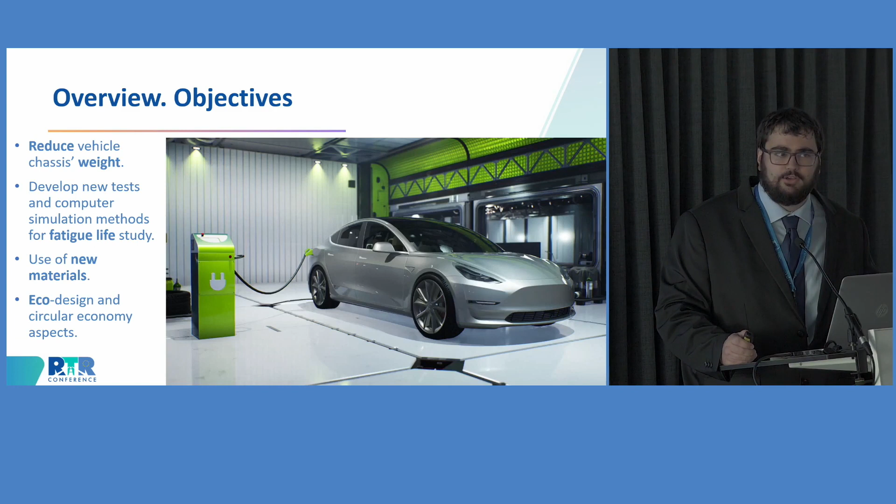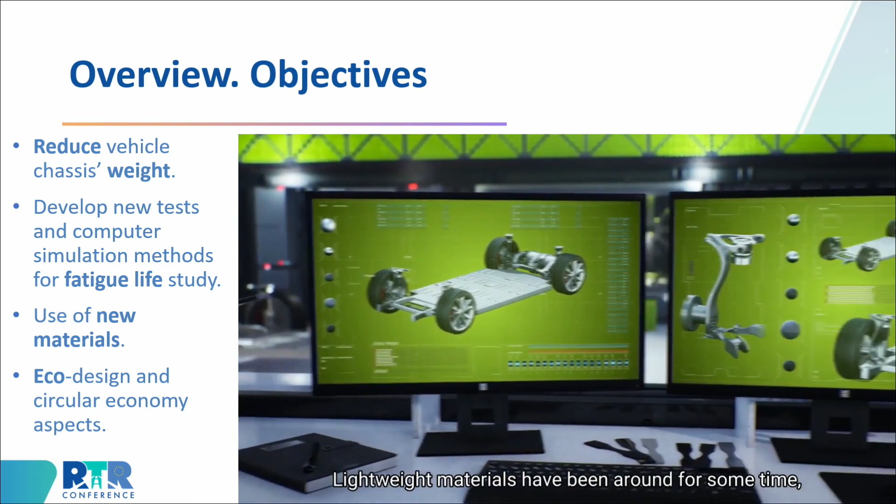Did you know that the chassis of an electric vehicle accounts for 50% of its weight? What if we could reduce the weight and thus increase the vehicle range while contributing to a more sustainable mobility? Lightweight materials have been around for some time, with great potential in reducing the vehicle's weight without compromising safety. However, they introduce significant challenges related to part design and performance.

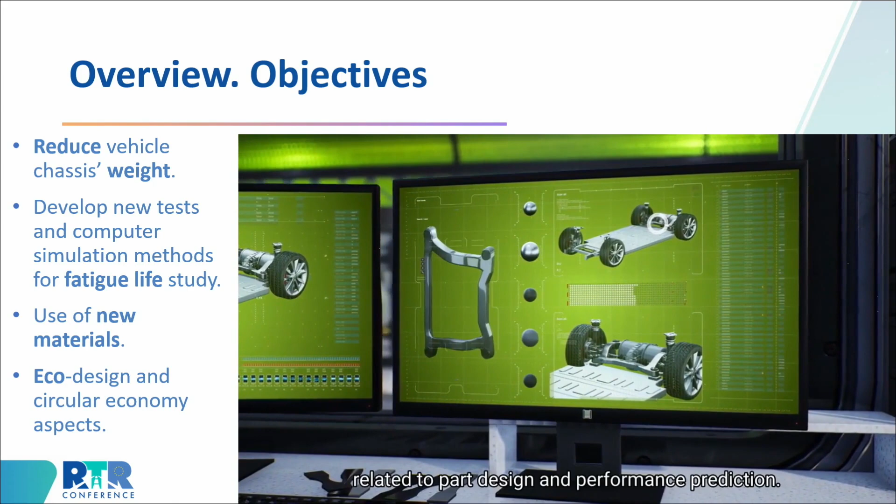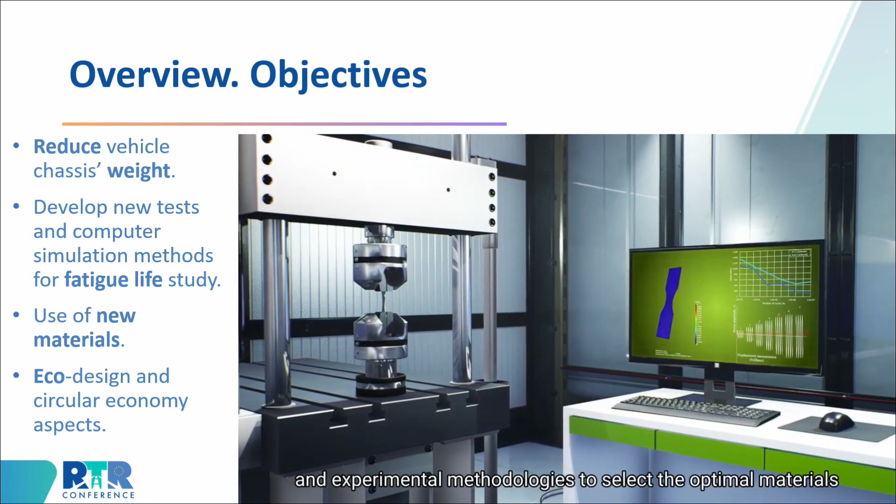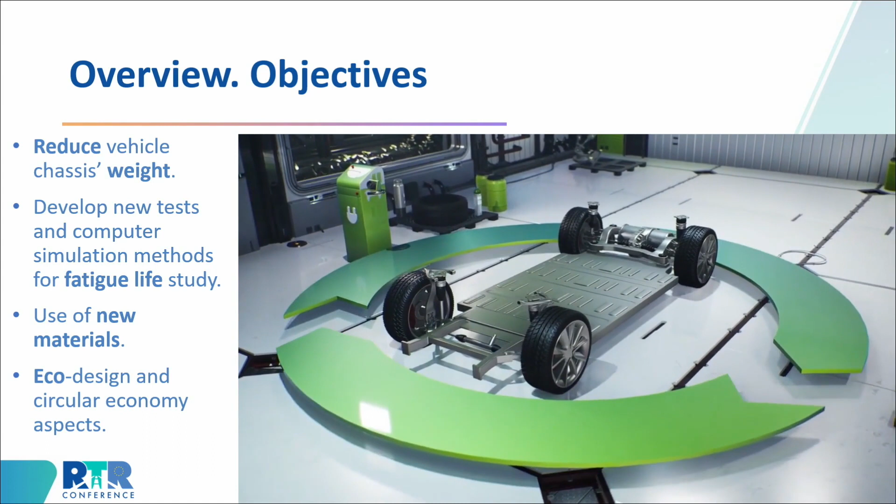Select the optimal materials for lighter vehicle chassis and reduce the testing time for new materials. Based on eco-design and circular economy values, Fatigue4Light aims to boost the use of lightweight materials adapted to the chassis parts of electric vehicles, enhancing weight reduction while increasing vehicle safety.

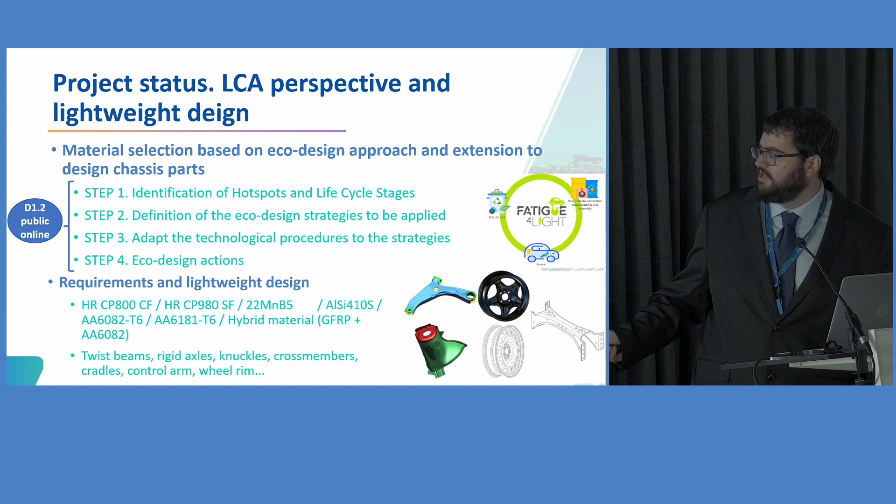Now, moving towards the experimental work, I've only included two of the main outcomes of the project. One is related with the definition or proposal of new experiments, new rapid fatigue tests, which we've used to characterize our materials and validate them by comparing with conventional techniques. We finally conclude that we've achieved a really significant reduction in time that will be interesting for industry.

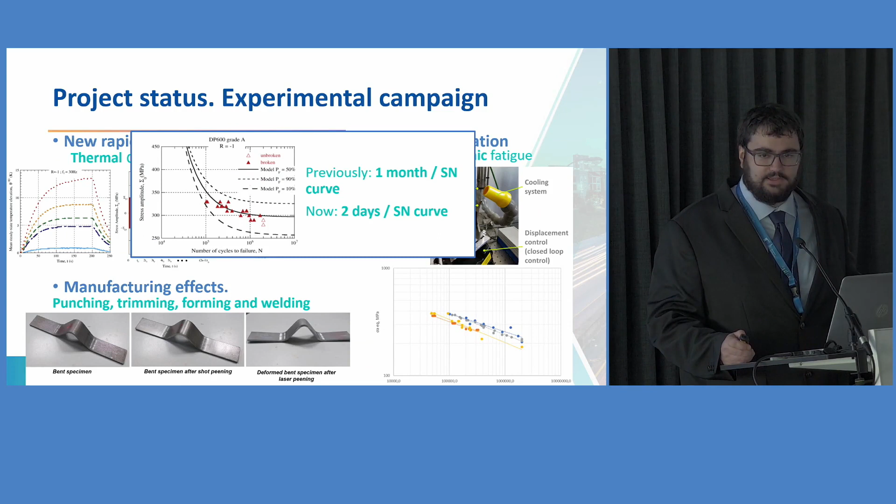I'm also including the big amount of effort that we've dedicated to the study of manufacturing effects, the effects that these manufacturing processes have on the materials we are studying. We've studied punching, trimming, forming, and welding, and we've seen the effect over the fatigue response of the materials.

So the first thing we've done is comparison with respect to the available, widely used commercial techniques for the study of fatigue processes. Then we applied this methodology on the study of advanced fatigue failures, including load sequence effect, residual strength analysis, and overload phenomenon. Right now we are finishing an extension of this methodology to include the manufacturing effects that we also studied experimentally, as I commented previously.

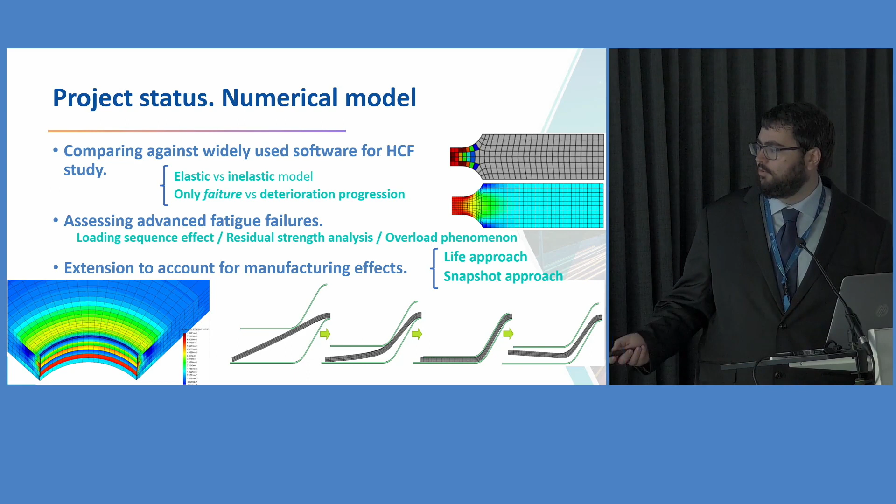Here you can see just two examples, one part of the punching modeling, and also of the forming modeling process.

Before going to the section on impacts, I would like to comment on some of the direct outcomes which can be quantified that have already come from the Fatigue4Light project, in terms of participation in congress sessions. In terms of published papers, we've already published 4 papers in peer-reviewed journals.

We've also worked on preparing dissemination material in terms of a website, the video that you've seen, working on social media and flyers. I have the flyers there, and if you want you can ask me for one, or I can distribute it now. We are also currently working on the standardization process of the experimental techniques I previously mentioned.

I also wanted to mention our participation in this Enlightened Electric Vehicles cluster, which we've used mainly to share in a more effective way with the whole community all the results and knowledge we are obtaining from this set of sister projects that are presenting today on this session. Up to now, we've been participating in joint seminars and congress sessions.

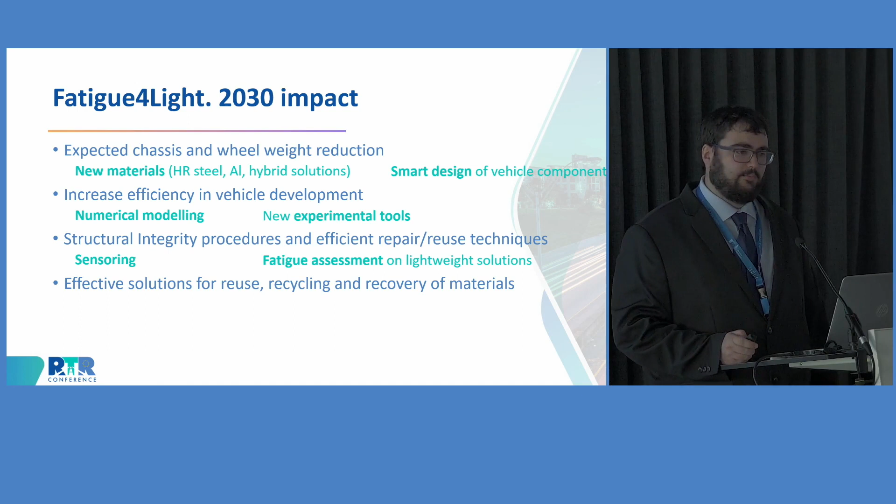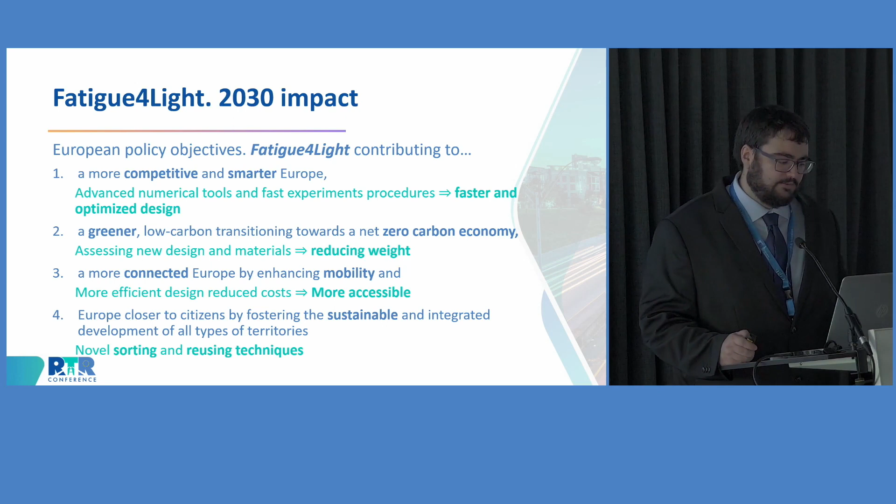My last slide is the connection of these impacts with the European policy objectives. This allows me to conclude that the Fatigue4Light project will contribute to generating a more competitive, smarter, greener, connected, and sustainable Europe. Thank you very much, and I will be glad to answer all your questions.

Okay, thank you very much, Mr. Jimenez. Are there any questions from the audience, or from you, Thilo? Do you have any questions? Just waiting for the audience.

If not, I have two questions. One is a scientific one: regarding the acceleration of obtaining the SN curve, the strain rate, is it similar to the incremental step test?

Not sure. We have published papers on these methodologies, so maybe you can check there. This work has been conducted by Eurecat. Sorry, I was saying I'm not sure about the frequencies they used here. We have published papers for these methodologies, so you can check which frequencies they used. But in fact, as far as I know, for thermal control, yes, the frequency is important, but what they expect is to reach a stable condition in which the temperature is not evolving, okay?

In which you reach this steady state there. But here you are not checking the temperature, you are just checking the evolution of the stiffness of the material. And I'm not that sure that they pretend to go on really high frequencies there.

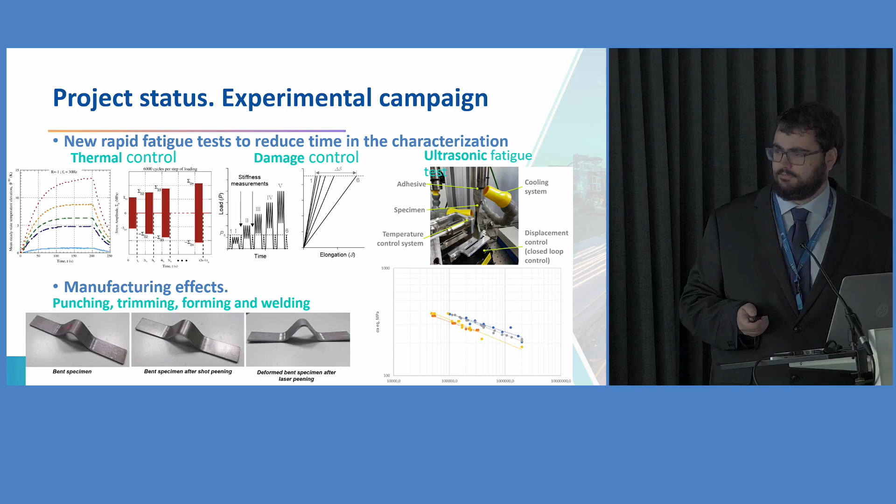Okay, I will check with the second question related to the end-of-life strategies. You mentioned that you have recycling concepts and end-of-life concepts. Can you elaborate a little bit more on that? I'm not the expert on that, Eurecat is working on that, and also RISE is working on that. We have this deliverable, which is public and available on the website. As far as I know, what we've been developing is the guidance that we should be following. Now, well, at the very beginning, and now we are ensuring that all the industrial partners which are involved in building these components are following this guidance. But I'm not really sure of which are the specific points that we are following there.

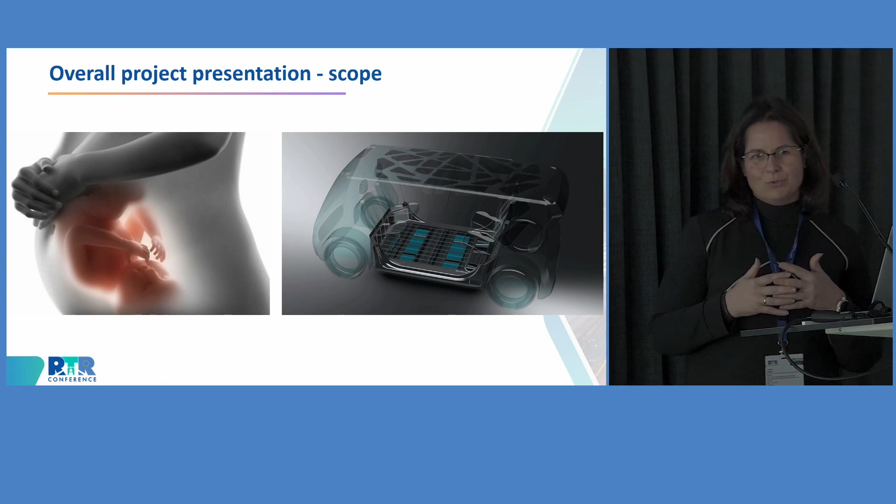If we talk about electric vehicles, we have 2 types of passengers. We have people, but we have another little passenger that is the battery. So we have 2 types of baby, and we have to protect both of them. So I always like to mention this because it's something that is really important. But as I said before, ALMA is about lightweighting.

So if we talk about specific objectives, we can talk about reducing the weight of the vehicle structure. In this case, we are focused on the body structure, the body in white. We are talking about incorporating new eco-design strategies because we have to think about meeting the requirements, but also about what happens when we arrive at the end of life. So from the very beginning, we have to think about this. In the end, the global objective is to decrease the environmental impact of electric vehicles at a global level.

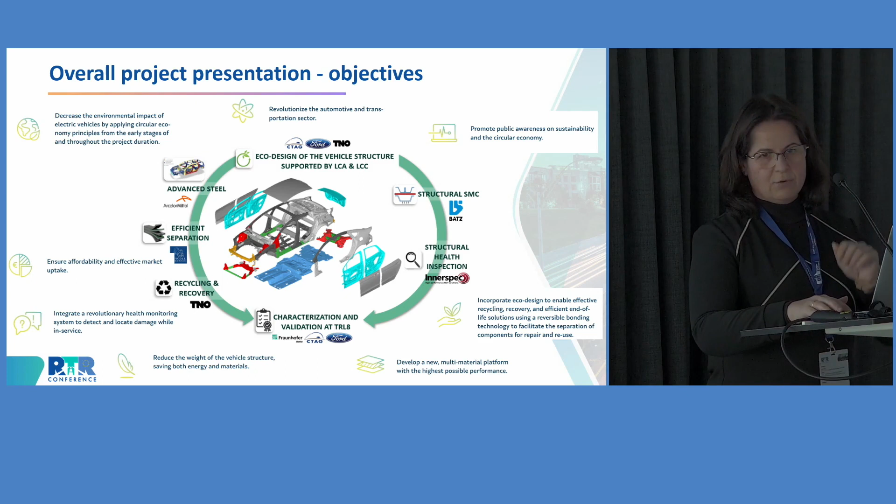And of course, as people were saying, we are in the automotive sector, so all the technologies, all the solutions we are presenting should be affordable. For us, cost and safety are the 2 main points. So this is our approach, but I'm going point by point.

First step. Our starting point was the Ford Mondeo, a standard vehicle, I mean an internal combustion engine vehicle. So the first point was to translate this structure to an electric structure. When we obtained this electric structure, we started to redesign. So CTAG, my company, worked on redesigning the whole structure. And there are three main points.

The first one is the best material for the best location. We have to know if we need more rigidity, if we need more energy absorption. So it's really important, the best material in the best location. Then, if we can integrate functions, we should. I mean, we are going to work with new innovative materials, and in some cases, we will be able to integrate 1, 2, 3, 4 parts in only one part. So this is important also.

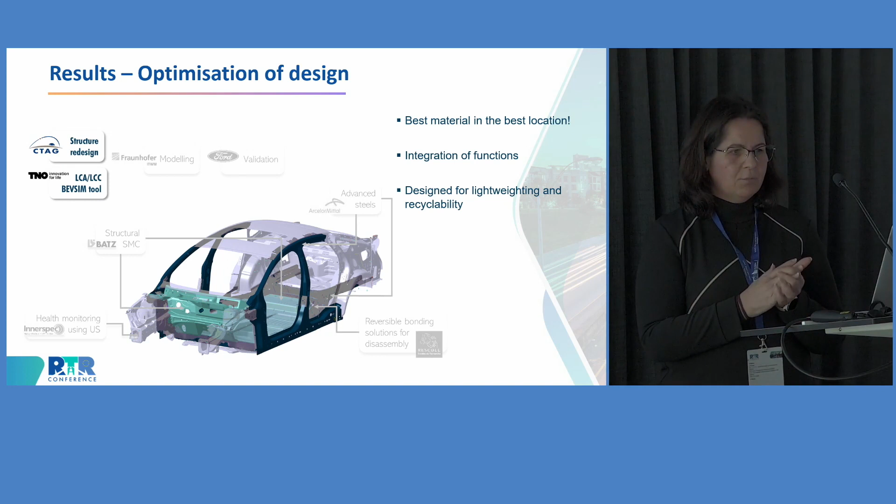And as I mentioned before, we are redesigning this structure for meeting the requirements, but also thinking of the future, of the end of life, of recyclability. So I repeat, CTAG was in charge of the redesign of the structure, and our colleagues from TNO have developed a tool, a BEVSIM tool, that carries out the LCA and LCC. Costs are also important for us.

If we talk about innovative materials, in ALMA we are working with two types of materials: steels, high-performance steels, of course, and SMC, sheet molding compounds, and in both cases, devoted to lightweighting, of course. In the case of steel, ArcelorMittal is responsible for that. We are working with three new steels.

One is a sandwich of steel and plastic. The other is a low-density steel. And the last one is a high-performance steel, an HSS steel. So this allows us to decrease the thickness of some parts. And the other important point is the possibility to integrate functions, as I mentioned before. At this point, we have changed 165 parts in steel.

And the other material, SMC, is based on resin with random glass fiber. And we are working with some glass fiber textiles to increase the rigidity of some parts. And our goal is to develop the battery cover and the dash panel.

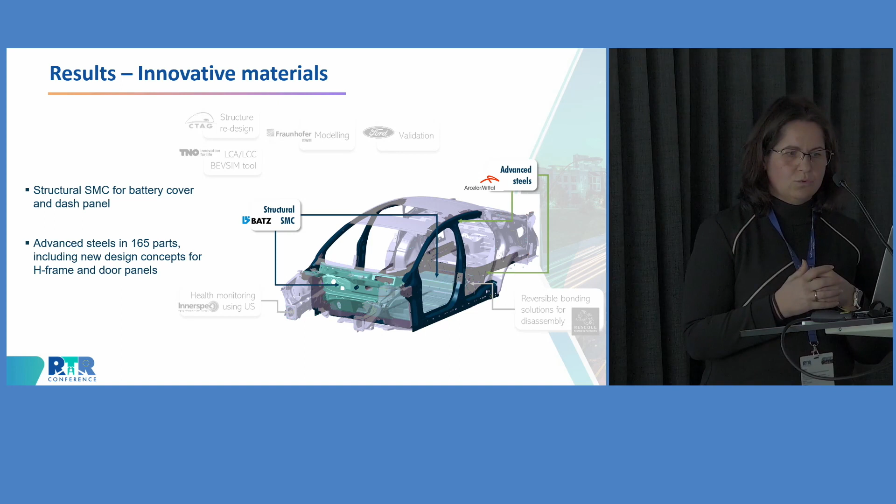Well, new innovative materials, new design, but we have to be sure that we are meeting the requirements of the car. So our colleagues from Ford have carried out all the tests and all the simulations needed to be sure that the crash behavior is right and we are meeting these requirements. And our colleagues from Fraunhofer have carried out the activities related to the modeling and the preparation of the material cards of these new materials.

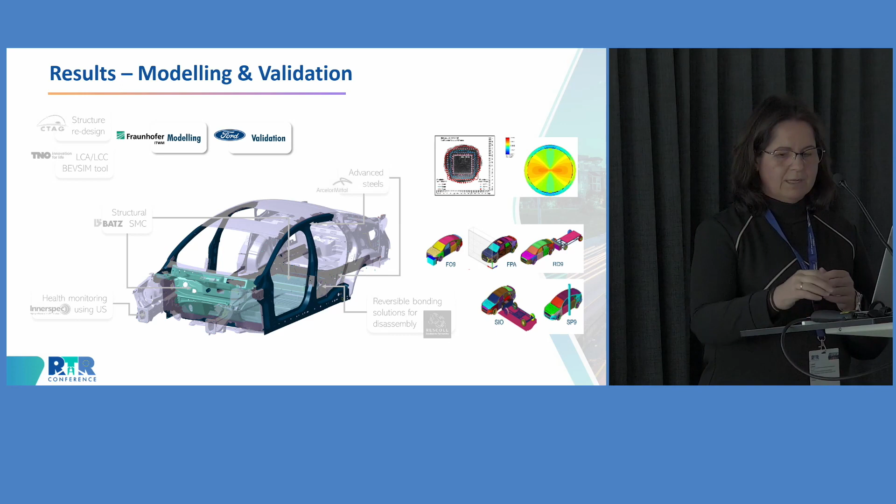And finally, in parallel, the SMEs, Rescoll and Innerspec, have worked on two different technologies. One is related to the adhesive. Rescoll has developed the debondable adhesive that is activated by temperature. That means that with this adhesive, we are able to join steel and SMC materials, and at the end of the life, we apply high temperature. High temperature means 250 degrees, more or less, and we are able to easily disassemble the parts.

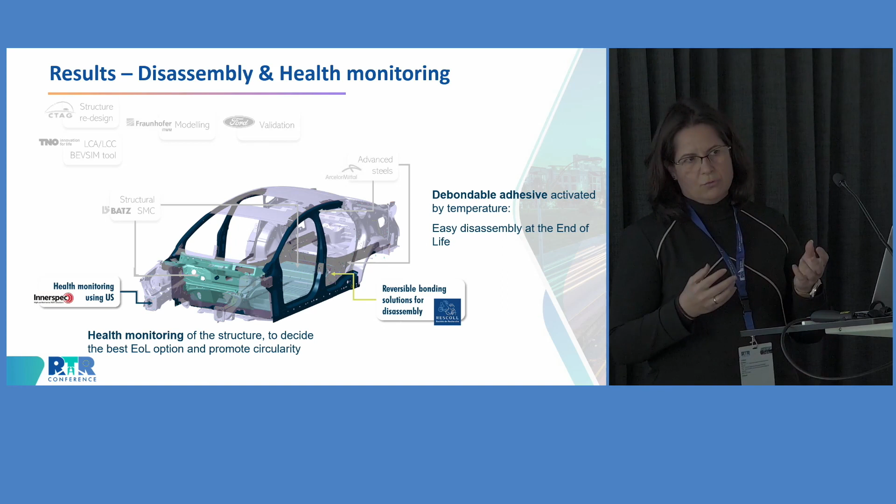And in the case of health monitoring, it's a technology based on ultrasounds that allows us to identify the status of the component. So when we reach this end of life, we are able to decide if the component is right or not, and we can reuse it or not. So this is the work we have carried out during these 2 years.

In the last year, we have to finish some technical tasks. We are going to focus also on the manufacturing of some parts to be sure that the technical feasibility is possible, and to be sure that all the results we have obtained at simulation level are right. So we are going to develop 2 or 3 demonstrators, 1 or 2 in steel and the other in SMC.

But this last year, we will be always focused on sharing the results and communicating the results. My colleague Sergio has talked about it before. We have a cluster and light clusters where LEVIS, FLAMINGo, Revolution, Fatigue4Light, and ALMA are collaborating, and our idea is during this last year to promote more activities, more collaborative activities to communicate properly our projects. And all this is with the support of the Horizon Booster.

And if we talk about the more important, what is the impact of our project, I would like to highlight 3 points. The first one is, I mentioned before, the BEVSIM tool. The BEVSIM tool is a tool that is available at our website and allows the designers to identify in an easy way what is the best solution, the best material and the best design for a component in terms of LCA and LCC.

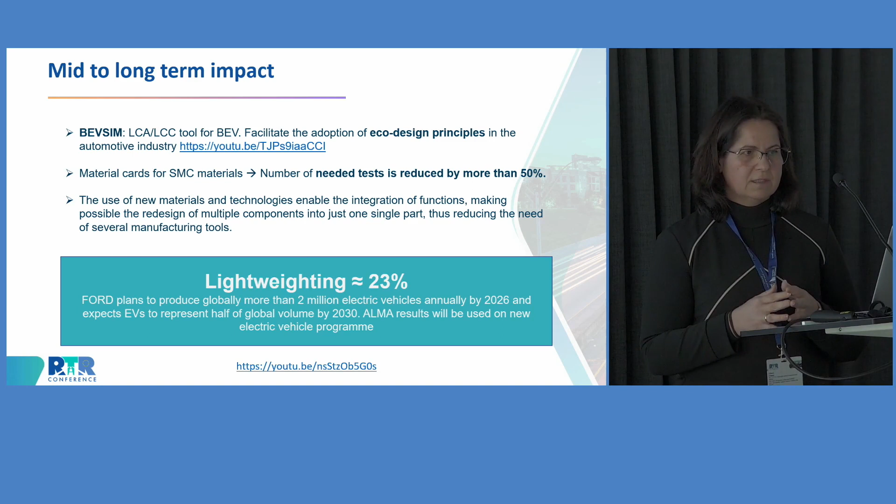The big companies in this project, Ford and ArcelorMittal, are now planning the launch of the new products, the launch of these new steels, and the launch of new electric vehicles. Ford estimates that around 2 million electric vehicles will be produced by 2026, representing more or less half of global volume by 2030. And the results we are obtaining here in ALMA will be present in these new cars.

So I have now... With the state of our planet's climate and fuel prices spiraling upwards, it's crucial to make electric vehicles more competitive against gasoline and diesel options. Range is still a key issue for battery vehicles, with long charge times and sparse recharging stations complicating the matter. With bigger batteries out of the question, lighter vehicles are the solution.

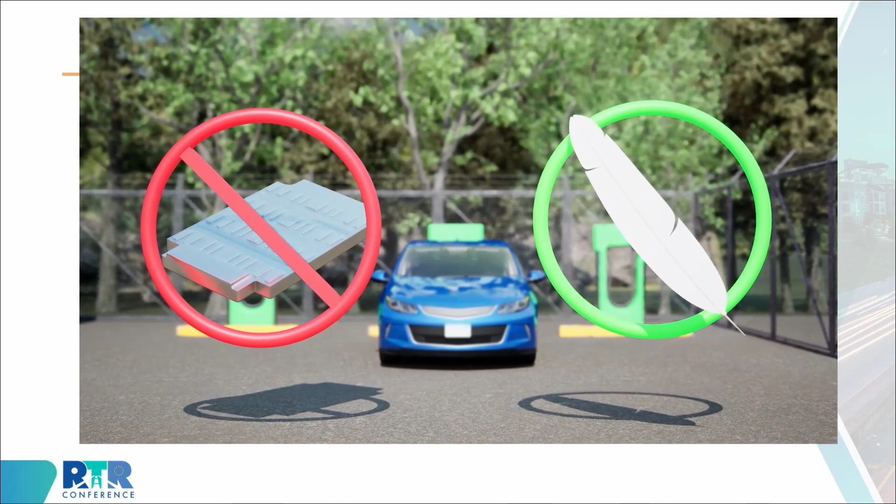The ALMA project is a multidisciplinary group of 9 partners from across Europe, all united under the same objective: to make electric cars more lightweight, efficient and sustainable through an eco-design approach that uses new advanced materials. The project will improve the sustainability of vehicles by addressing each of the circular strategies.

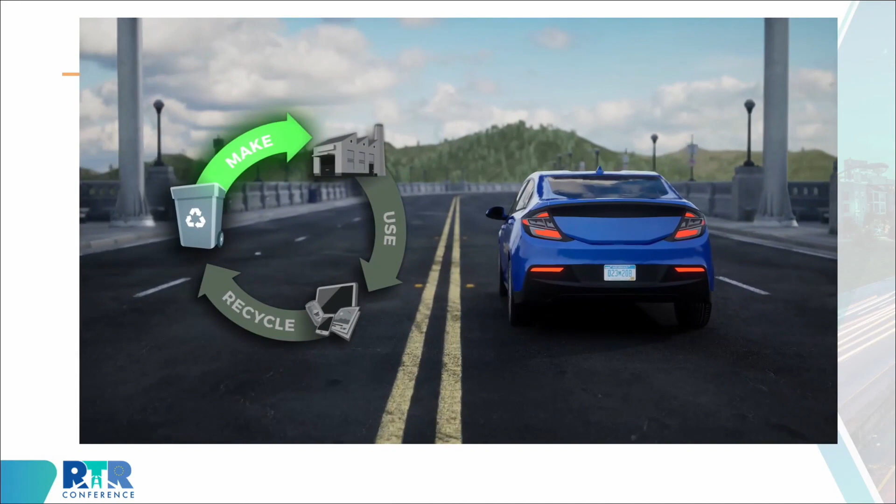Performance on the road will be improved through innovative lightweight materials, thereby enhancing range and reducing energy consumption. Lifespan of the vehicles will be increased through health monitoring with sensors that detect damage and parts in need of maintenance before a critical failure.

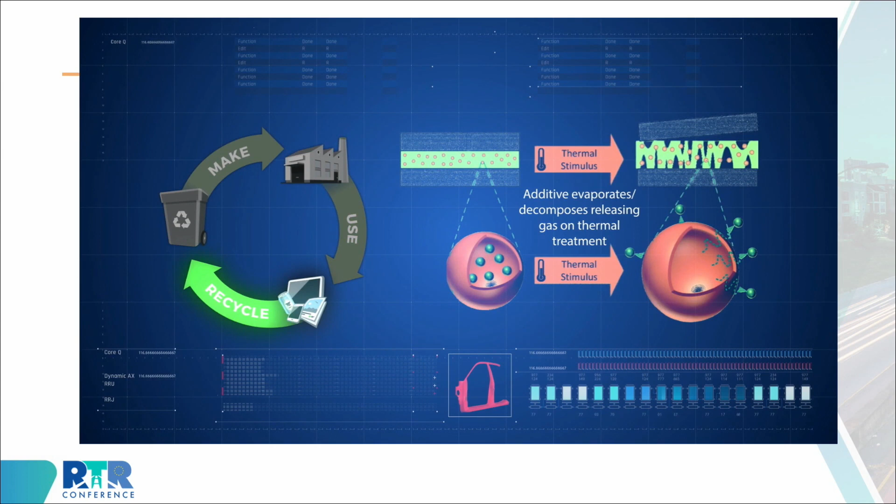End-of-life scenarios will be optimized by ensuring recyclability of materials and debondable adhesives that can be activated to allow easy disassembly. The consortium has already achieved a 23% weight reduction compared to the baseline, reducing total weight by 200 kilos. This saves 240 kilowatt hours of energy and 84 euros due to lower consumption on a yearly basis. The vehicle's range is expected to increase up to 6%.

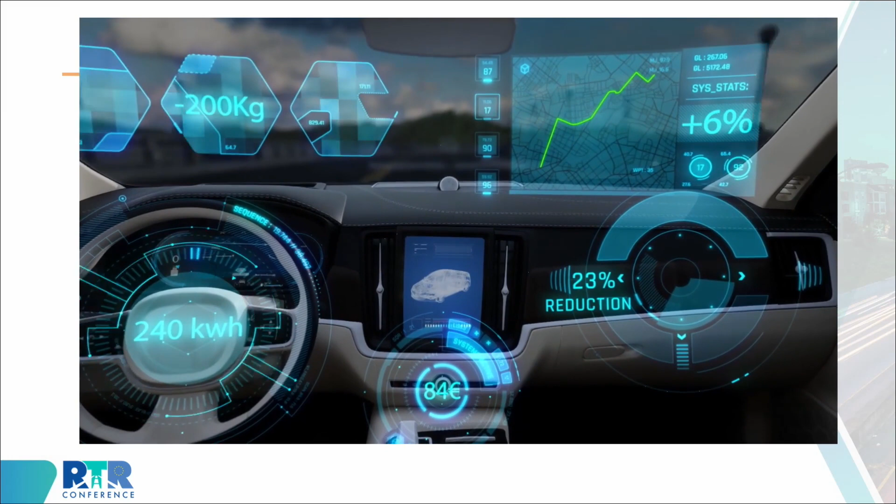To help achieve these results, the ALMA project has developed BevSim, a life cycle analysis tool for battery electric vehicles. Many ideas and materials can be tested much faster in simulations, saving a lot of time and money. ALMA, revolutionizing the automotive and transportation sectors through eco-design principles.

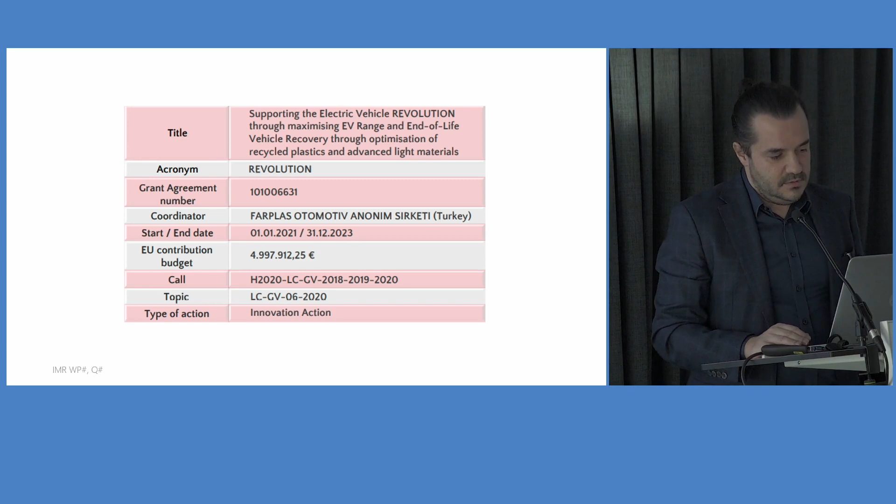The consortium consists of OEMs, injection molders, tier ones like we are, research institutes on topics like analysis, material development, AI, and special additives manufacturers. I like the way that this consortium is built, because more or less each partner is contributing in parallel without waiting for the other ones to complete the task and then starting their own. All the progress in the Revolution project is more or less shared by the partners equally. So we are the coordinator, and some information about the budget and everything.

One thing I would like to emphasize is, except for one thermoform case, the production method is injection molding here, preparing materials to be used in injection molding and using artificial intelligence to optimize the input of recycled materials. So the target is to achieve 10 to 40% lightweighting part-wise, and while selecting the parts, the consortium cared that these should be a family to represent a bigger share of the car, and the final lightweight potential could be a lot bigger than that represented on each part.

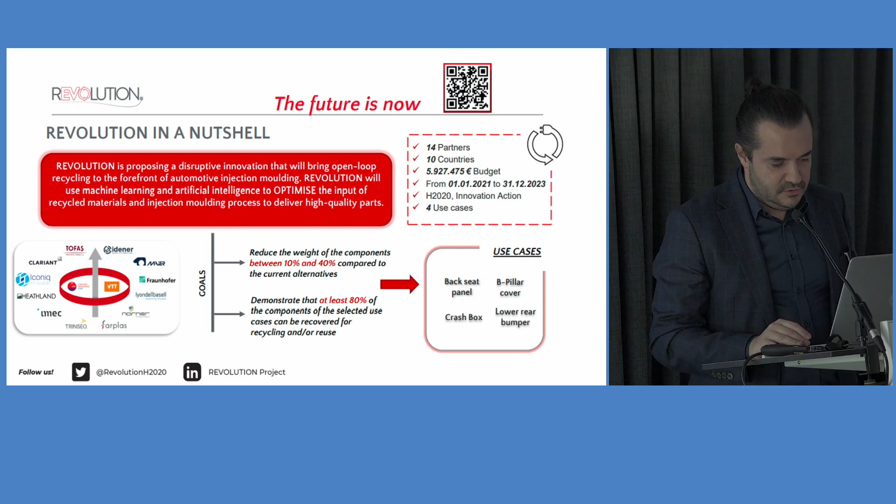And also, just like I mentioned, the circularity potential should be high, and in each part we try to implement circularity and recycled materials. So the parts are back seat panel, B-pillar cover, crash box, and lower rear bumper. These are aesthetical parts, structural parts, body parts. We thought when we achieve those lightweight potentials with circular material, introducing the right methodology to produce the materials and to process them, while measuring all the technical data during all the processes will help us to bring the solution to the injection molding related automotive world.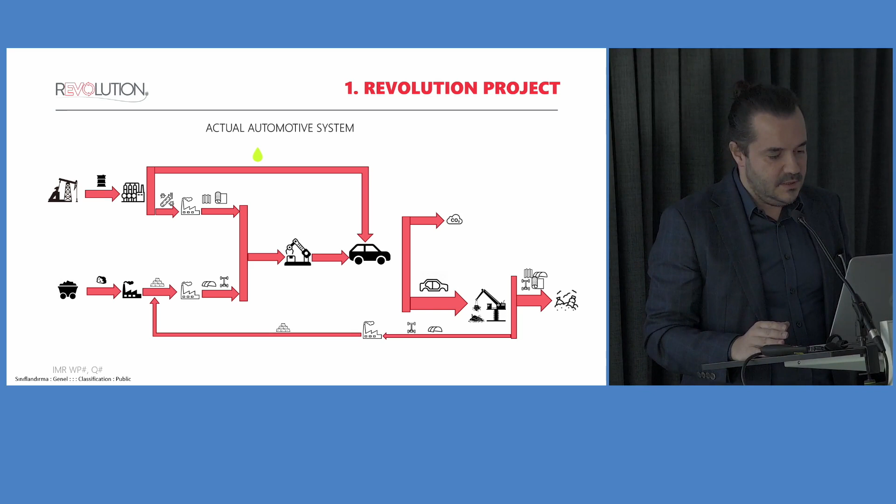So our target is, as mentioned here, lightweighting, superior performance, and end-of-life advantages. Implementation is proceeding as mentioned here: optimization of lightweight material, development of advanced process control, modeling and design, demonstration, and validation. This is how materials and energy in automotive should not be benefited. How we introduce in Revolution is the cradle-to-cradle approach, where circular materials are brought back to the production.

Two cases are used here. One is mechanically recycled materials used in the parts. In the other case, polymers are brought back to the monomer phase, and polymerization occurs to make these automotive polymers. So in a wider explanation, these are the parts that we target in the project. The rear back seat panel: there we use self-reinforced polyolefins, and the polymer itself is used to make fibers and the polymer matrix. There, again from PCR content, thermoforming is used, and the backseat panel is going to be manufactured.

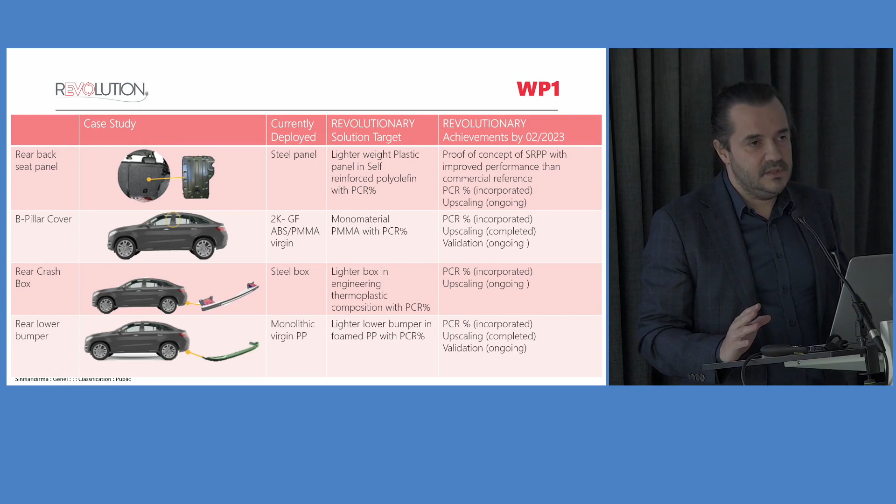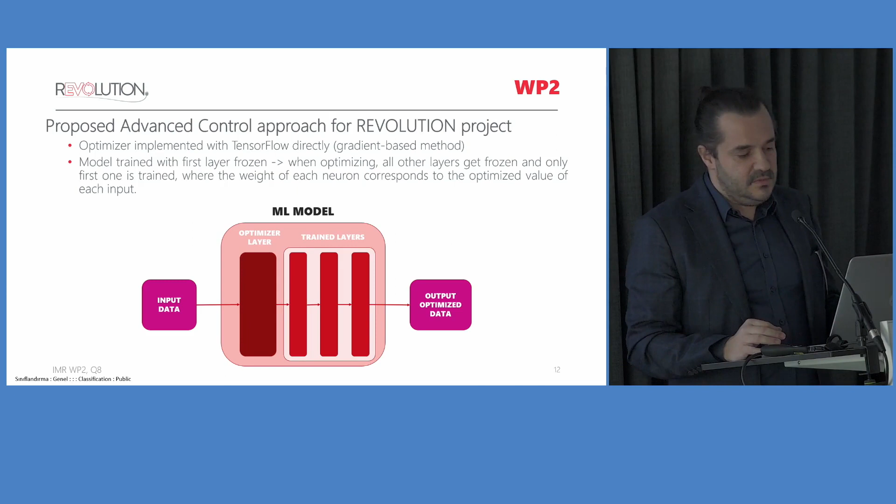At this stage of this project, all material categories have been produced, and the tests, the FEA finite element analysis tests, have been made, and the materials seem to be production ready at the moment. We will proceed with tool development.

Of course, the part design has followed in cooperation with material design, and the tool development is following at the moment. And in the very near future, we will produce the parts and see whether we have reached our targets that have been calculated in the simulations. So part design is not the only simulation we make for this project. One other really important approach is the process design.

Farplas is one of the partners that contributes to this project with data and AI, just like IDENER and VTT partners. Before this project, we already had a big data system in our plant, and we were trying to understand the relation between quality measures and process parameters by collecting data from the production. There we could find some methods that contribute to quality issues, but without one fact. We were thinking everything is okay, even the material properties are okay.

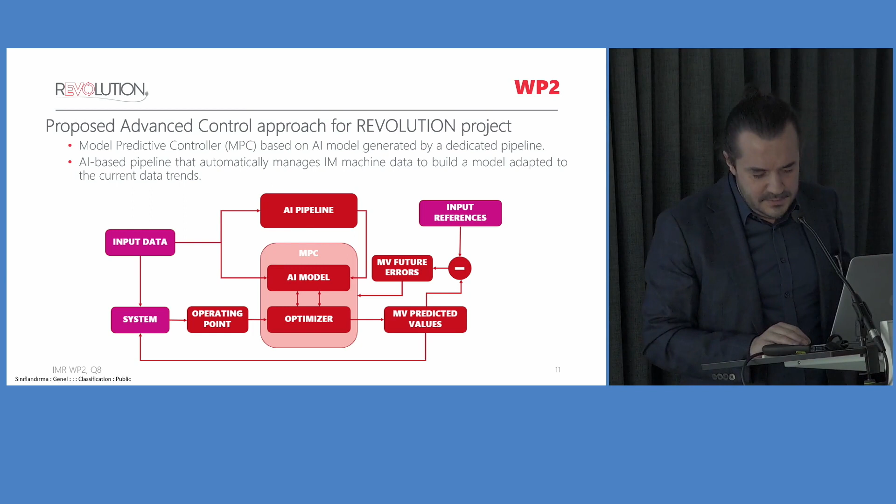During the material production, partners like VTT and BASF are working hard for circular material with constant properties, but also in our plant, with the support of our AI partner IDENER, we work on an intelligent line that can process circular materials, maybe with fluctuating properties, in order to get constant quality parts all the time. So this AI pipeline works for this, and the models have been implemented already.

Now we are building new sensors especially to measure the flow nature of the material during the production, because flow is quite crucial for injection molding. Imagine polymer chains might be broken into shorter ones, or there might still be some longer ones. Your material can flow fast or slow from shot to shot, so we want to control this. Even though this is a lightweight call, we knew circularity is an approach for the same aim. That's why we made an intelligent line for this project.

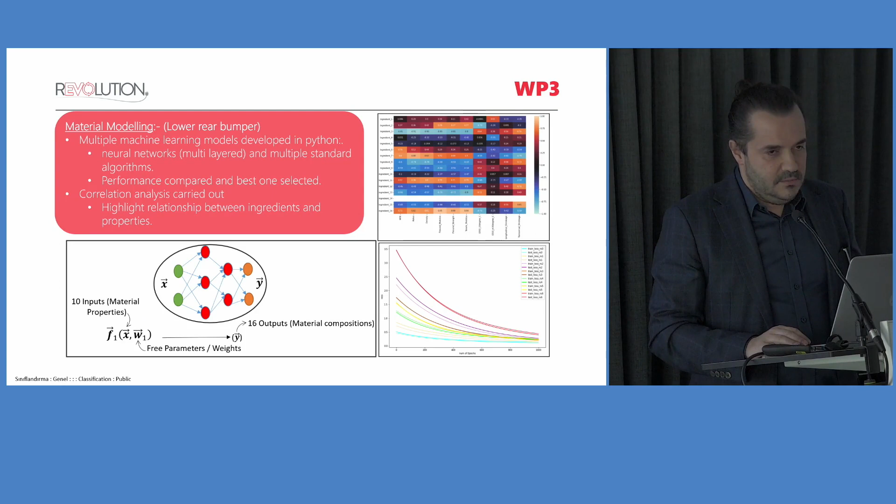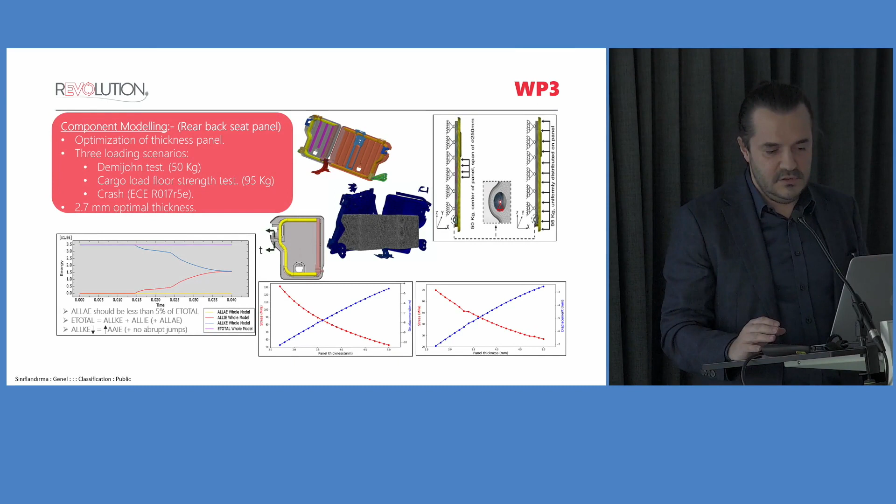Okay, I'm about to finish soon. So the process modeling has been made, material modeling has been made, and component modeling has been made during work package 3 for all components, materials and processes. And for our project parts like crash box and bumper, especially for the crash box and bumper, the process modeling and part modeling has taken a lot of work and time.

So objectives for demonstration and validation are: obtain lightweight with circular design approaches with advanced materials, evaluate EV range advantages with all demonstrations, structural part sensor applications. Not only do we want to control the material production and the process, just like the projects mentioned before my talk, we will have sensors on the parts and see how circular material proceeds in its lifetime, in its work time on the car. We will measure this.

This is going to be measured via tensile strength between phases of the material. You could say measuring what happens between fibers and polymers and minerals and the polymer chains itself. These sensors will measure how the part is taking the stress during its lifetime.

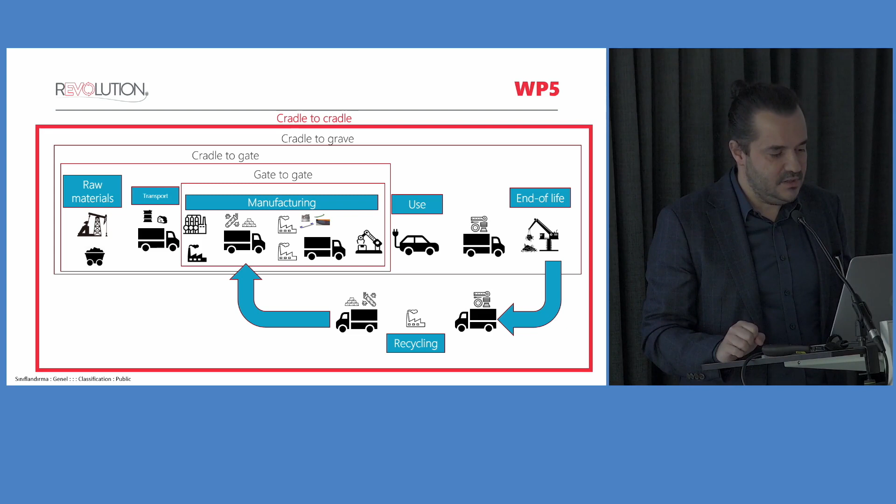Our approach is cradle to cradle, since all actors, all partners are trying to make a value together, from raw material back to raw material, manufacturing and use itself. This is our approach.

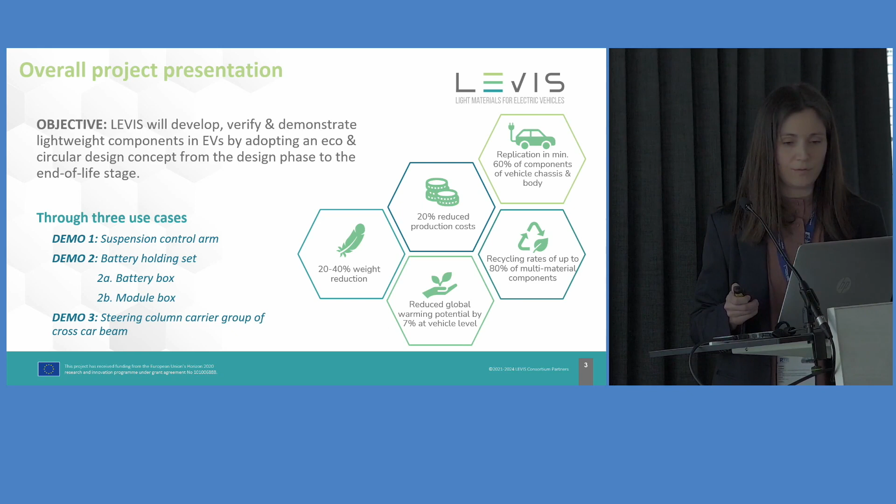So now I will present some of our results. The first and most important result from the LEVIS project is our new design of the demonstrators. We have proposed different hybrid metal composite designs which are easily disassembled. So at the end of their life, we can separate, for example, the metals and the composites, and we can later also treat these composites to obtain the sub-components.

So those are the current designs. Most of them are frozen, and some of them will be very soon frozen. So we have our final designs, and we have estimated weight reduction around 35% at the component level, depending on the use case. With the replicability study that we have performed, we have found to which other components, that are not studied in LEVIS, this reduction could be applied. So we estimate that we could obtain up to a 25% reduction in the chassis.

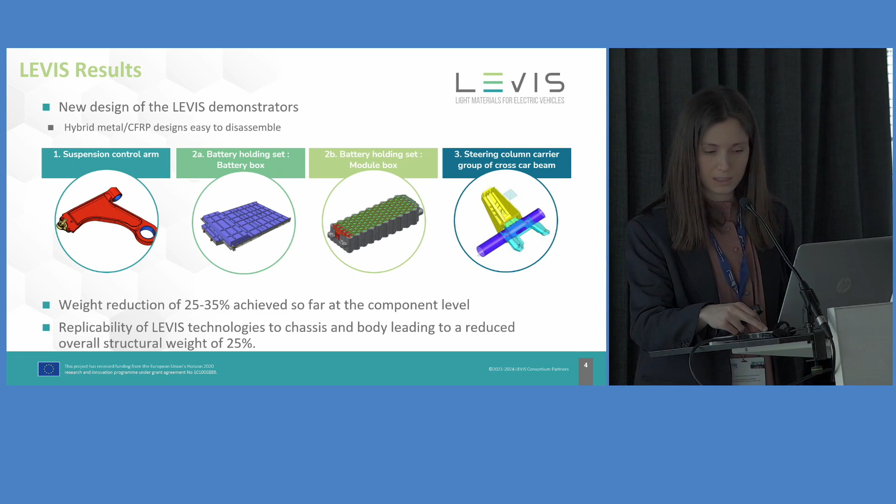Now I will present you briefly some results from different parts of our project, the most relevant ones. The first is the development of new bio-based, recyclable and recycled materials for electric vehicle components.

For example, we have developed a cost-effective bio-based carbon fiber to replace traditional commercial fibers. With these bio-based fibers, we are able to speed up the production process, and the mechanical properties we obtain are close to the target that was initially proposed. With these fibers, and also with standard commercial fibers, we have developed thermoplastic tapes.

We have not found any equivalent product with the matrix that we selected. We chose a thermoplastic matrix so it will later be easier to disassemble our components.

We are also working on some components using short fiber composites, and in those cases we are using specifically recycled carbon fibers, obtaining good results in our components.

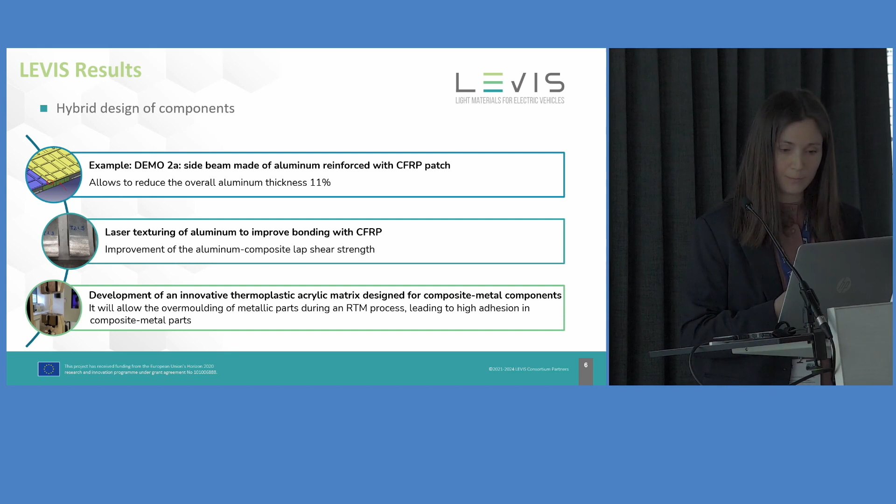Another part of our project is sensoring, which has been previously mentioned in some projects. In this regard, we aim to include sensors in our components so we can monitor if they fail, or their state at their end of life.

For that, we have manufactured different sensors on demand. We have tested different geometries, materials, and sizes, and we are working on their integration during manufacturing in our components.

With the information we obtain from these sensors, we have developed some structural health monitoring systems. With different active and passive techniques, we are able to monitor, depending on the component, different failures that could take place, for example debonding or delamination in composites. So we obtain a lot of information from these sensors.

In terms of sustainability, as I've said, we want to obtain high rates of recyclability and reuse of our components. For that, we are working on the development of a debondable-on-demand structural adhesive, again specially designed for our purposes. This is a commercial structural adhesive modified with particles that are thermally activated.

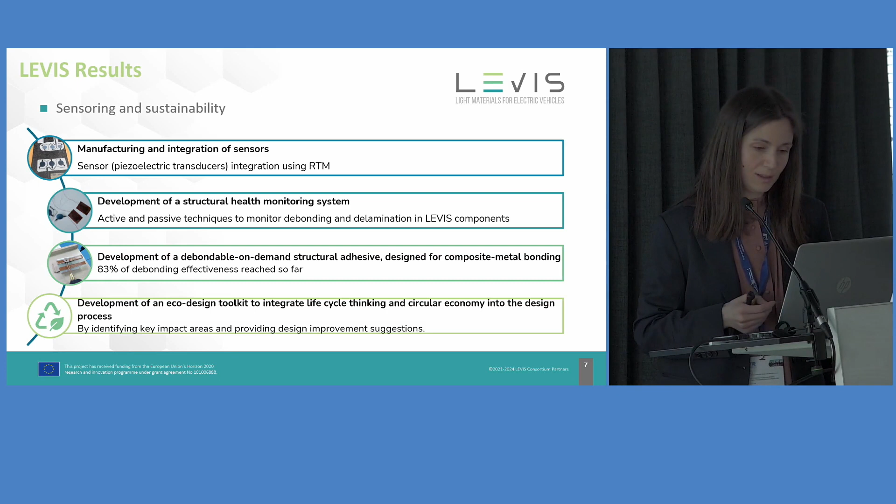an eco-design toolkit to integrate life cycle thinking and circular economy into the design process. This is a tool that gives you suggestions, advice and tips when you want to do a design, so you include this eco-design perspective in your design.

Finally, about dissemination, we have also given presentations at many conferences and written papers, but I would like to highlight the cross-project cooperation with the sister projects. As has been previously said, we have created the Enlight LEVIS cluster, so we can join our forces and communicate our results.

We are also organizing an event with the Revolution project about sensoring. If any of you are interested in participating, you can ask me or my colleague, and we will give you some information. We have also presented 2 patents from the Demo 2a, which is the battery box.

I would like to finish with the impact of our project.

As I've presented previously, one of the most important objectives of the project is to obtain a significant weight reduction. With our materials and manufacturing processes, we obtain lighter components. Also, we obtain safer components, thanks to the structural health monitoring that can give us information about the state of the component and some prediction about their remaining useful life.

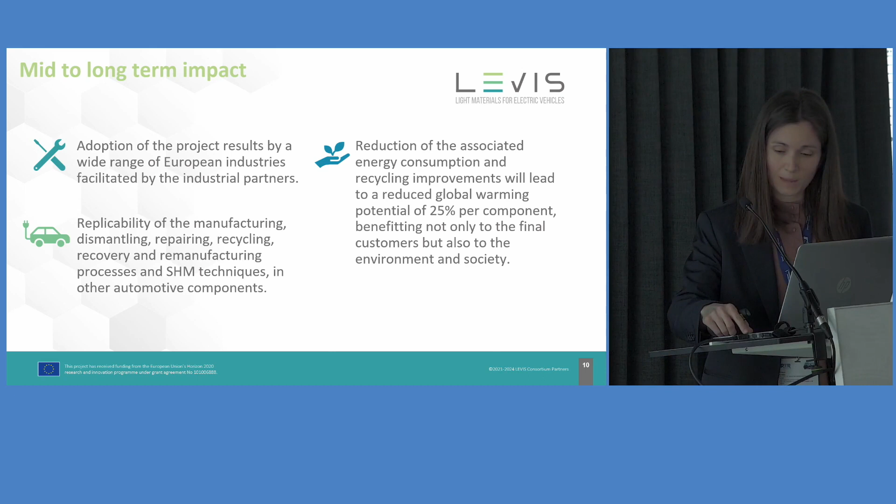So that's all from my side. Thank you.

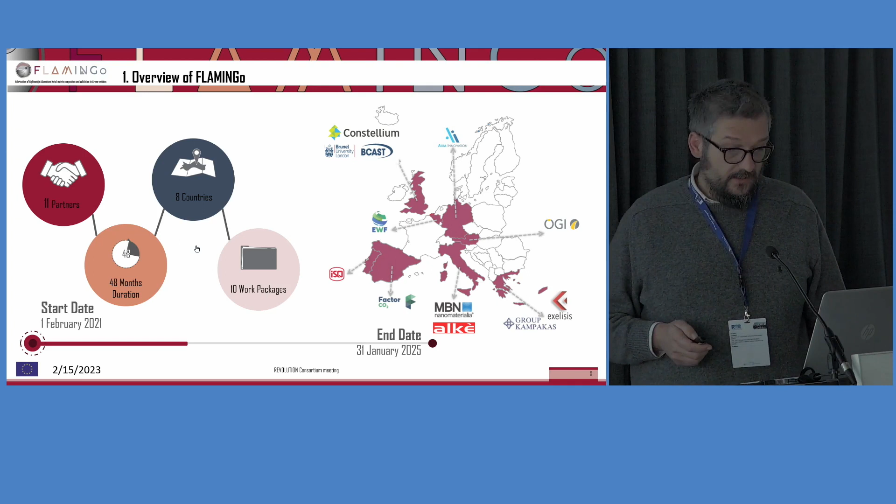The consortium is spread all over Europe. The project is of the same kind as the others presented today, but it is a bit longer. All the partners have been brought together to have good coverage of all the production processes that deal with the aluminum metal matrix nanocomposites - metal alloying, low pressure die casting, green sand casting, topology optimization, extrusion welding, non-destructive techniques for material and component characterization, and recycling. Then activities supporting the results, particularly LCA standardization, and also nano safety assessment, not mentioned here.

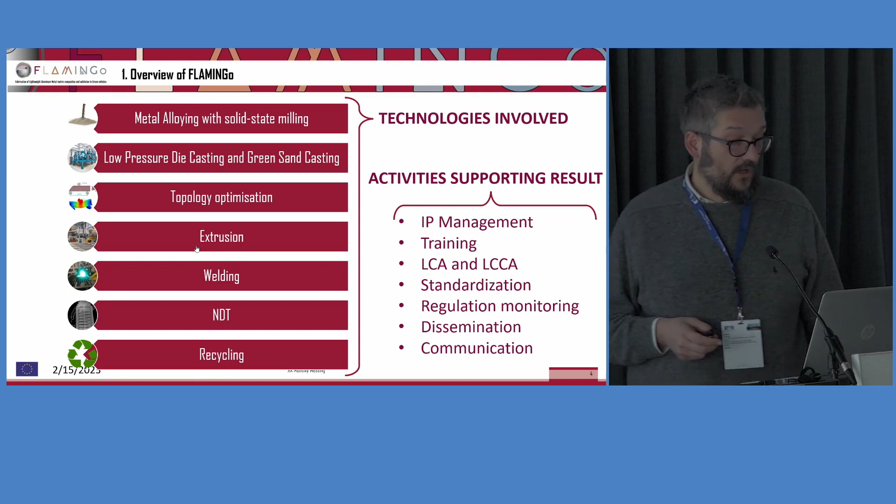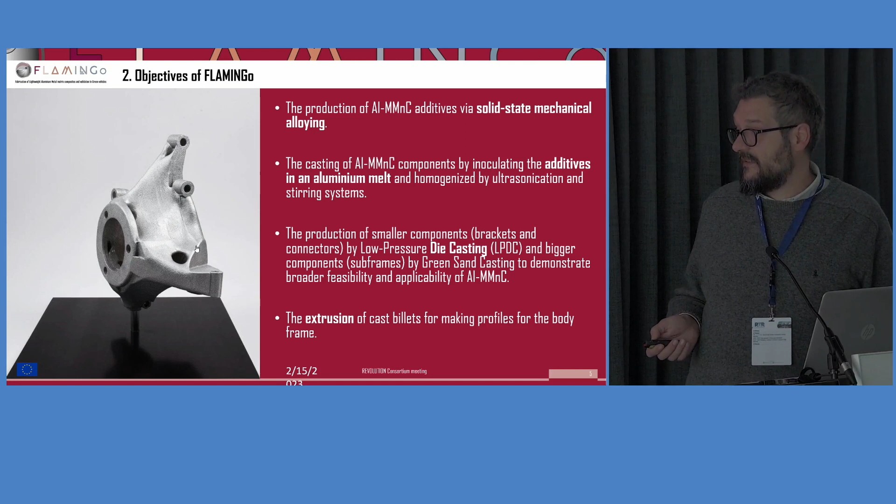The objectives of the project are quite focused on the material itself. We have the production of nanoparticle additives via solid state mechanical alloying, their casting into billets through techniques like ultrasonication and stirring systems, and then the use of this in die casting, low pressure die casting, green sand casting, and extrusion to produce components.

This is supported by activities on assessing the weldability of the material we get from this process, the topology optimization of the components to maximize the possibility of a lightweight component, and the validation of recycling these materials using techniques already available from companies that are already doing aluminum recycling. The overall target is to obtain a material and components that can substitute for steel, particularly in electric vehicles.

So the overall flow of activities and processes is this one. There is the initial manufacturing of these master batches. They are used in foundry to produce this cast material that can be used for extrusion or die casting.

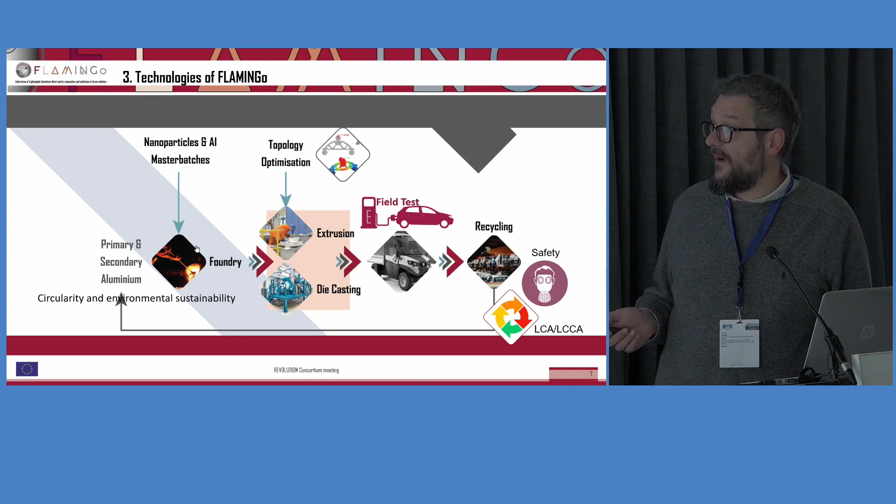The installation of the components in a vehicle, the actual use of the vehicle, and then the recycling. The field test is a part of the project that basically makes this project extend more than the other four that we have seen today.

One important thing to notice is the fate of the nanoparticles and the role of recycling. So one of the core ideas of this project is to follow the material evolution throughout all the value chain, all the supply chain, and to be sure that when it reaches the market, when it reaches its end of life, it can be treated as any other aluminum component, so without special regard. And in order to do that, we knew that nanoparticles have to be somehow removed from the cast eventually. And this also plays a big role in the overall costing of the material.

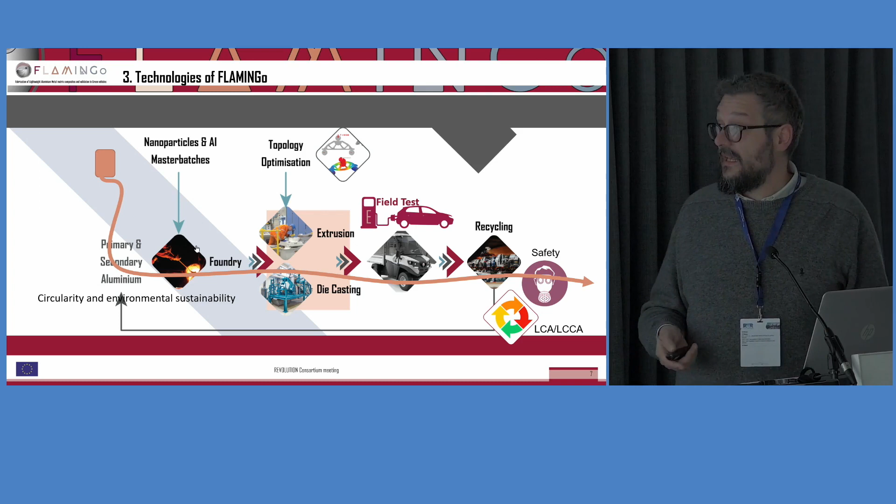Since we are dealing with nanoparticles, there is also a good part of nanosafety assessment, because we want to be sure to provide eventually all the guidelines, all the information for the use of these materials in any stage of their value chain without any troubles.

So at the moment, we are focusing on a couple of quite representative components from this vehicle produced by Alke, one of our partners, which are the steering knuckles and the rear frame. So these two parts here. The idea is then to do an extrapolation exercise once these components are validated, and once we have all the information on the mechanical properties of the material, to other vehicles and to the entire Alke vehicle, keeping in mind that the target for the cost is €3 for each kilogram saved, because these materials are not going to cost less than the current materials.

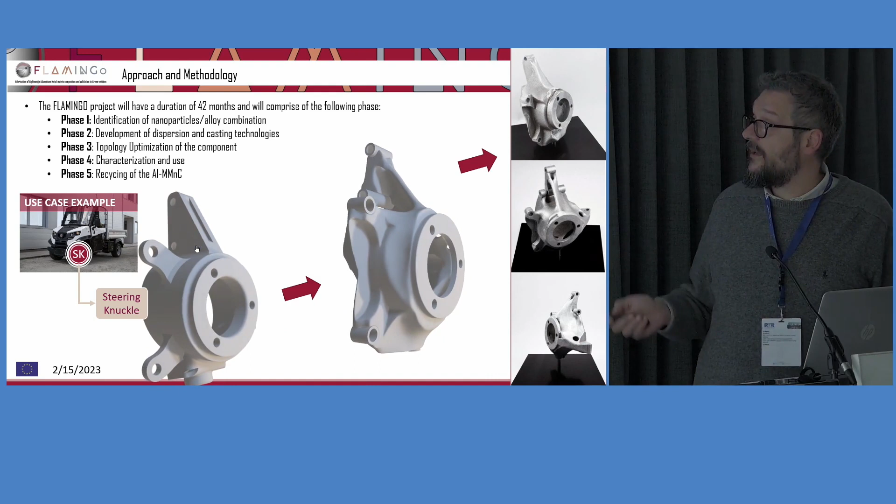So currently, we reached at component level a reduction in weight between 31 and 58% on the steering knuckle, and 35% on the extruded rear frame. The difference between these two numbers is strongly related to the technique for the casting. Yeah, I have an example here. This is the component, the original steel component, the topology optimized component in aluminum, and the actual component obtained after the casting. There are different techniques of casting.

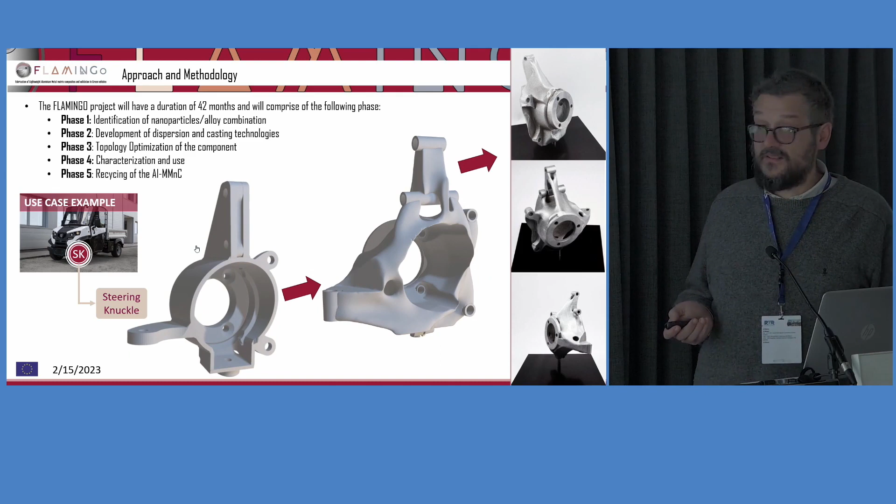One that we are using in the project is sand casting, in which the mold is quite flexible in terms of the design of the components. This allows reaching the maximum lightweighting possible. Low pressure die casting, on the other hand, needs a mold that puts some constraints on the design of the components, and therefore a lower overall weight reduction.

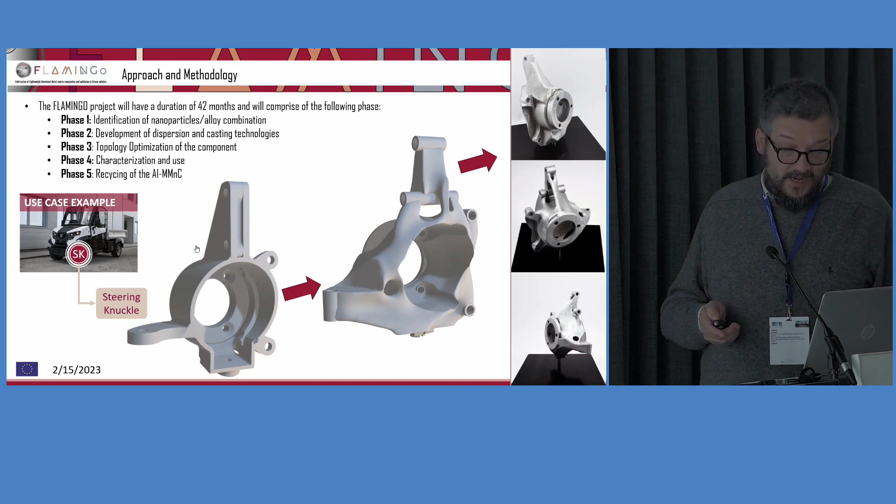We're not applying the same topology optimization on the extruded parts, of course, because that wouldn't make much sense. But the FEM analysis on the current components utilized in the vehicle and the new one that has been designed for the extrusion die that is being used these days will provide the same results for the extrusion part as well.

On top of those weight reductions, we are working in parallel on the material itself, which allows an increase of mechanical properties, both in the alloy for casting and in the alloy for extrusion. There are a bunch of X's here because we tried different alloy compositions, on one hand, to pick the best performing one, and on the other hand, also to gain knowledge on how to transfer this concept of metal matrix nanocomposites onto different aluminum alloys.

So I didn't introduce much the concept of metal matrix nanocomposite, but basically the idea is to have this additive that is rich in nanoparticles and can be used in the cast without giving the casting company the problem of dealing with direct handling of nanoparticles. And these nanoparticles enter the cast as a grain refiner, basically, improving the overall yield strength, tensile strength, reducing the elongation, and in some cases also improving the elastic modulus.

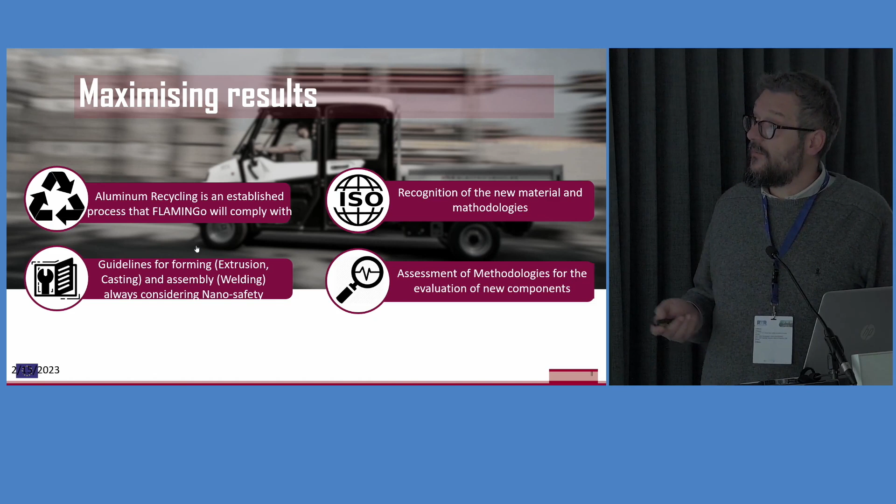The writing down of these guidelines for forming, assembling, and handling of the nanoparticles, always considering nano safety. These are meant to increase the applicability of our results by other companies, casting companies, extrusion companies, and of course the assessment of methodologies for the evaluation of new components. That is part of the non-destructive techniques activities that need to be done on the final components and during the months in which the components will be used in service.

So about the Enlight EV cluster of projects, this was something that has been initiated because we knew that between our projects there will be not a single winning solution for lightweighting electric vehicles, and possibly to have a platform in which to put together all the results in a single portfolio. So far, I think we successfully reached the possibility to do some common activities on LCA, at least on the front of sharing our results together in a webinar. That can be also a first step forward to share something more like baselines for evaluation of the results.

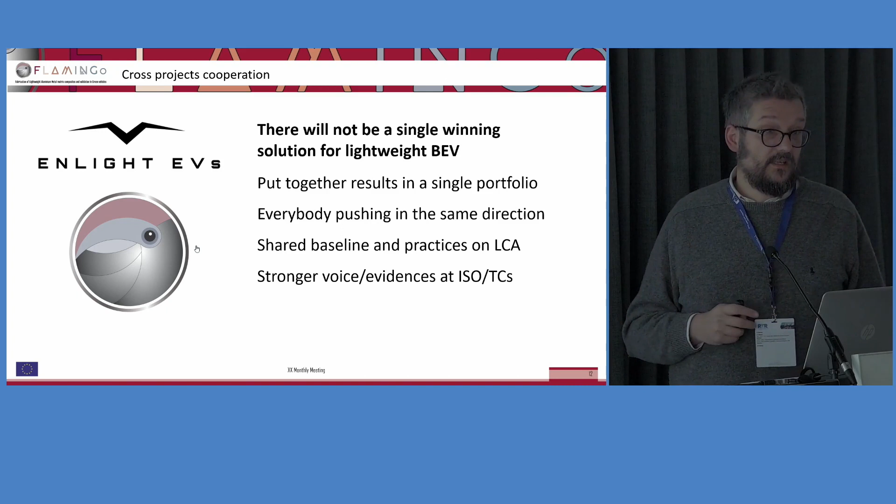Ideally, we will have together the possibility to have stronger voices and bring evidence to technical committees on ISO. From our side, for example, the activity is more on recognizing the aluminum metal matrix nanocomposites as a material for the automotive industry.

As regards impacts, in the short term, of course, there are impacts that are mainly related to the vehicle that we are currently targeting. So more off-road capabilities, more functions. This is a utility vehicle. Increase the working range of the fleet and enable more flexibility in vehicle configuration. These are all directly derived by substituting components with aluminum ones, lighter ones, and therefore increasing the overall range, basically.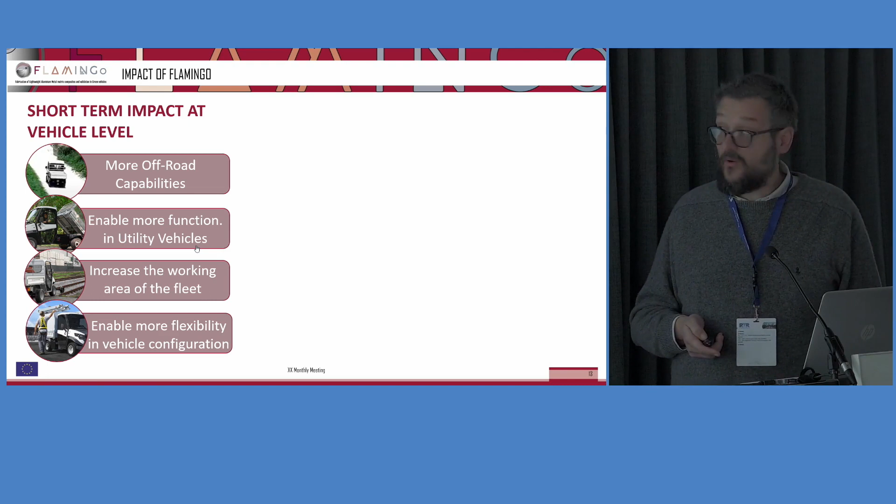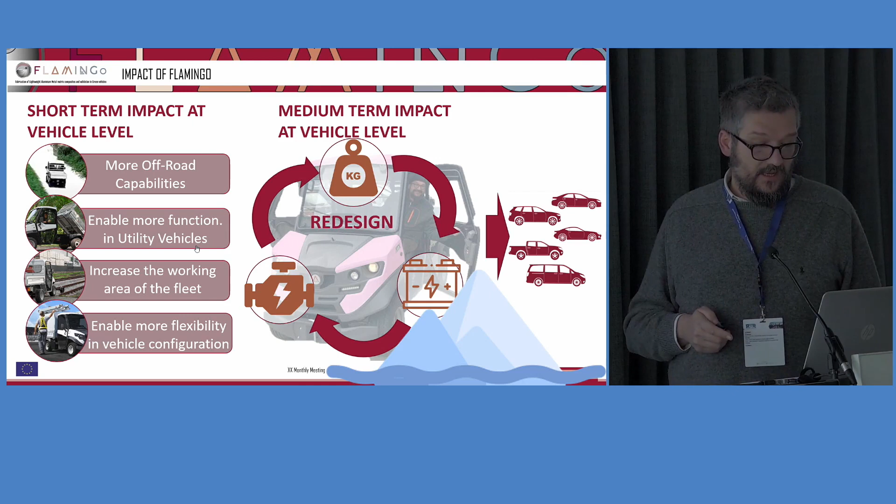But on more medium-term impact, there could be the possibility of an overall redesign of the vehicle, in which the reduction of weight enabled by the use of aluminum metal matrix nanocomposites results in a reduced amount of battery, and possibly also a redesign of the entire vehicle engine system. This, of course, is something that our partner ALKE is looking at as a medium-term impact of the project, but could be implemented by other car manufacturers in other vehicle sectors, and we are actually open for that. This, of course, is just the more evident impact, the tip of the iceberg.

What lies behind is the possibility to establish wide guidelines for workers using nanoparticle-enabled materials. That for us is very important to support the uptake in the market of this solution. Similarly, the guidelines for recycling: we are not aiming to invent new ways to recycle these materials, but just provide guidelines on how to use the already existing technologies by the aluminum recyclers to deal with this material. Because at the beginning, there will not be enough aluminum metal matrix nanocomposite to be collected and recycled on their own. So this guideline will improve the recycling capabilities of the current practices.

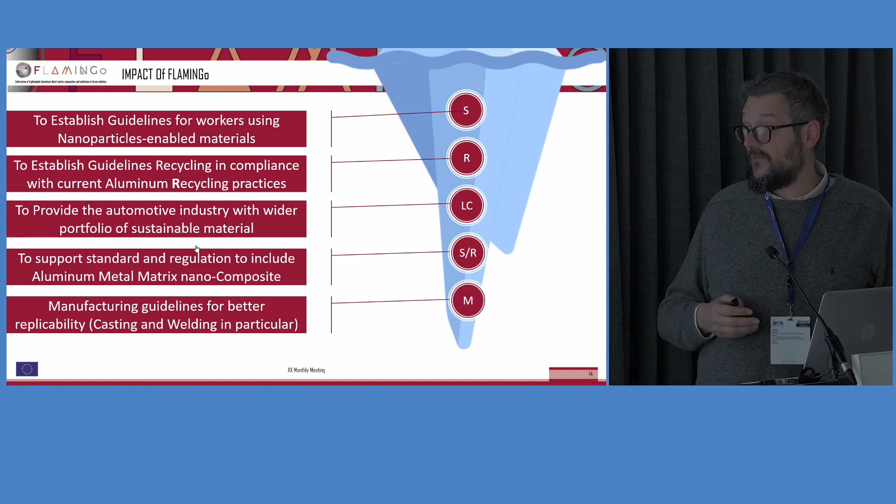The availability of a wider portfolio of sustainable materials is one of the main goals. The support of the inclusion of the concept of nanoparticles in the current regulations and standards, especially in the automotive market, and manufacturing guidelines for casting and welding. And these will be the main results for the uptake in the market of this material. And I think I covered all the parts. So thank you.

Thank you. Are there any questions? If not, I have one. Can you elaborate a little bit more on the motivation for using aluminum metal matrix nanocomposites in comparison to conventional aluminum grades? Yeah, well, this gives the possibility to increase the mechanical properties of the currently available aluminum, and it is currently used by Constellium for their high strength line of aluminums. There are different mechanisms that increase the mechanical properties. One of the downsides is the flexibility of the material, so it will be more rigid, but of course it is always a compromise.

In general, nanoparticles are providing smaller grains in the crystal structures, and points in which the dislocations are scattered and blocked. So basically performance-based. Performance-based, yes. Thank you. Maybe one question. Yes, one.

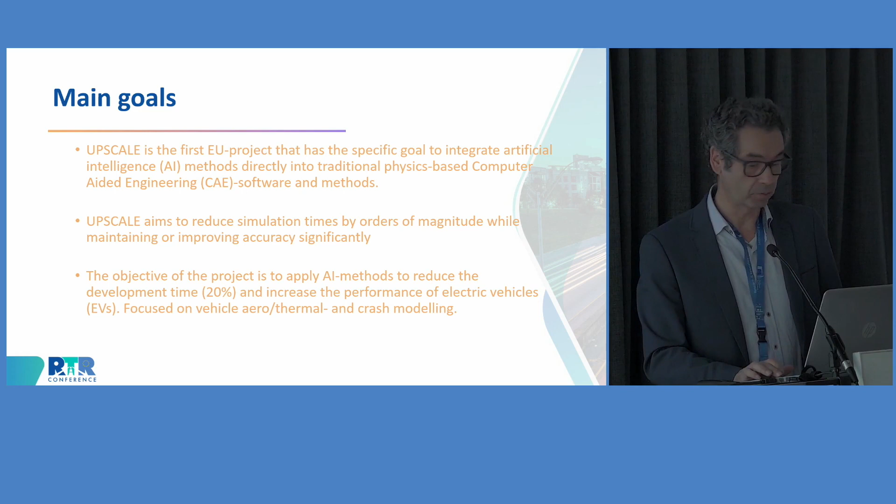So in key figures, Upscale had the challenge to accelerate the simulation methods by several orders of magnitude, and accelerate typical program development of an EV by 20%. And that's the key figure that we were afterwards measured for. And then we chose two applications: aerodynamics, CFD, is one, crash is the second one. The reason is these are the two disciplines requiring the most computational resources, so here's where we have more potential to reduce simulation times.

And here I try to explain what we did. We'll show the results next, all the results, but I'm taking a bit more time showing the motivation and the object of the project. So traditionally, we have been doing what Mr. Einstein is doing. We simulate the physics. When we do a crash, we know the laws of physics that we need to solve in that structural problem, and in the end we end up with a big equation system that we need to solve.

What we are solving by finite element works very well. We have been doing this for 30 years. But let me tell you, in these last 30 years there have not really been breakthroughs in this. This theory was developed before computers came, applied when computers became available, and we're still doing the same. We do this very well, the results are very good, but it's not fast. For a crash or a CFD, typically you may need one overnight run to get the results. So we want to improve this, and the way to improve this is by introducing artificial intelligence.

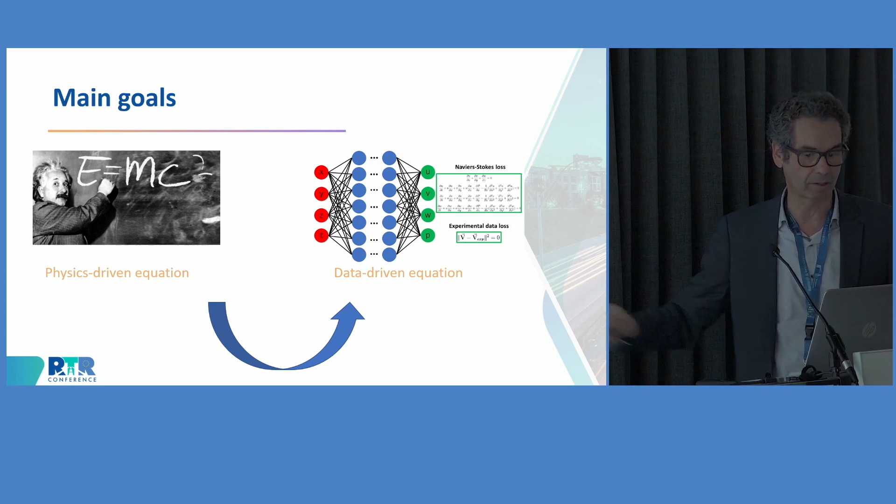Let me go already to the results. We applied this to two fields. First to aerodynamics, second to crash. In the field of aerodynamics, we had a dream. Instead of having an overnight run, or maybe a 5-hour run, 6-hour run, we want to get the result, the aerodynamic forces, in seconds, or in less than 1 second, okay? That's our dream. So for doing so, what we figured out in the consortium was, if we have a new shape, we want to know the aerodynamic force on that shape.

If we can parameterize this shape in order to get a kind of digital signature of the shape, a mask of the shape, okay? In the end, if we can represent the shape by a very limited number of figures, for instance, 15, 20 figures, we can link the result to this. So we get a lot of data of the aerodynamic forces on very different body modifications, we populate a database with this, and then we apply machine learning, and we have the machine learning model. That's the idea, okay? But for doing so, we need to create a lot of data.

We need to pre-run a lot of simulations. If you don't have the data before, you need to generate them, okay? So first, we need to parameterize the model and modify it to generate a lot of variants of this model. For doing so, we use what we call the geometrical parameterization. So we just morph the vehicle, and we know which dimensions have been modified, okay? So that's the characterization of our vehicle. And with this data, we populate the database and we train the model.

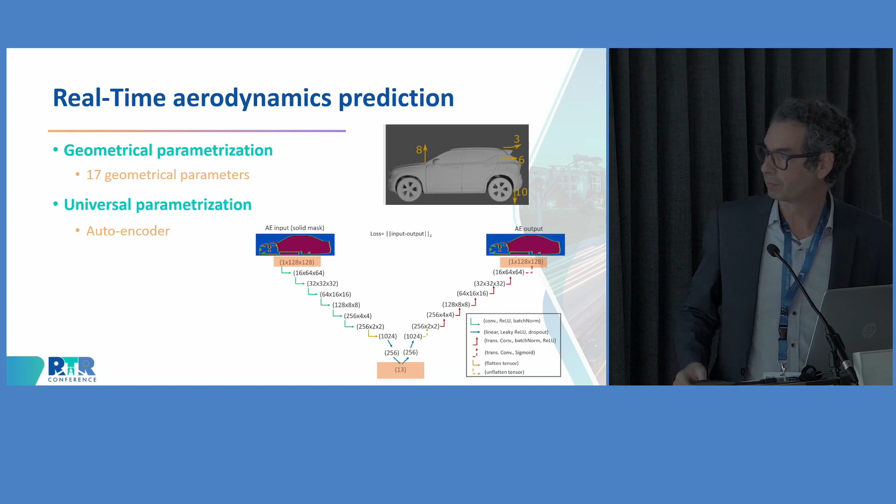So we need to develop what we call a universal parameterization method that reduces a shape to a very limited number of data, okay? In this case, we are showing an example for 2D, and it reduced the definition of the vehicle to 13 values. When we did it for 3D, it could be done in 17, less than 20 values. So when we have a completely new shape, this can be represented by 10 numbers. So this is the definition of our new shape. We are using this autoencoder technique, a machine learning technique that allows us to do this. We developed this in the frame of this project.

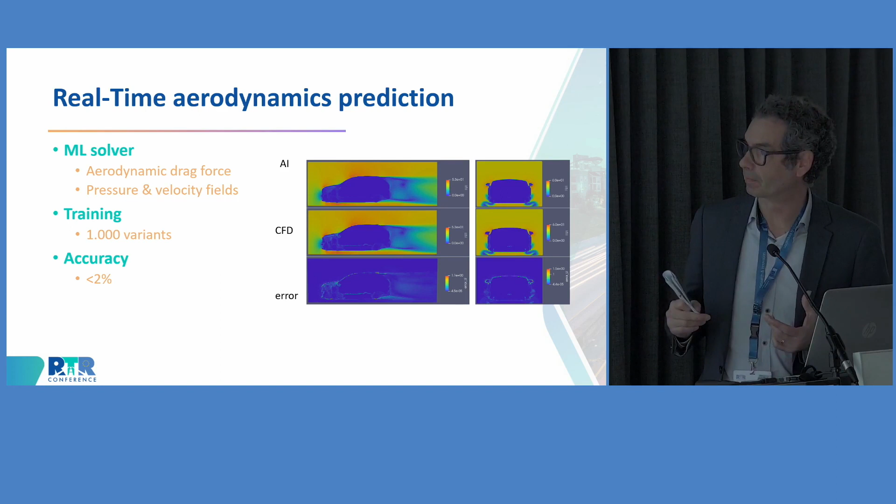And then what we did is generate this design of experiments. In this case, we took one of the vehicles, we got 1,000 different variants of the vehicle, and we got the results in CFD, the aerodynamic forces, and the airflow maps around, okay? We drop all this into the machine learning. Different techniques were tried, and as you can see here, we are getting very similar flow maps to what was introduced. So these velocity maps, pressure maps in the air, are achieved with an error of less than 2%.

And then the aerodynamic forces. That's the same. We have all these variants with the aerodynamic forces. We drop this into the system, we train this, and when we recompute, we can get the aerodynamic forces in 1 second, okay?

And then here we fulfill the dream of our designers, because our designers want to basically modify the shape and at the very same moment know if the aerodynamics is being improved or it's worse, okay? And we can achieve this with an average error of 0.65%. So that's very good, okay? So that's the first challenge achieved in this project. We can get the aerodynamic forces in real time.

So that's an example of using artificial intelligence, machine learning, to solve the flow field and the aerodynamic forces. And then I go to the next block, which, sorry, no, I was not finished here. We introduced machine learning for other applications. Also, still in the field of CFD, we had to run 1,000 simulations, okay? That's extremely costly. So we also had the goal of improving the traditional CFD process, which includes different steps: the meshing, the simulation, the post-processing, and so on.

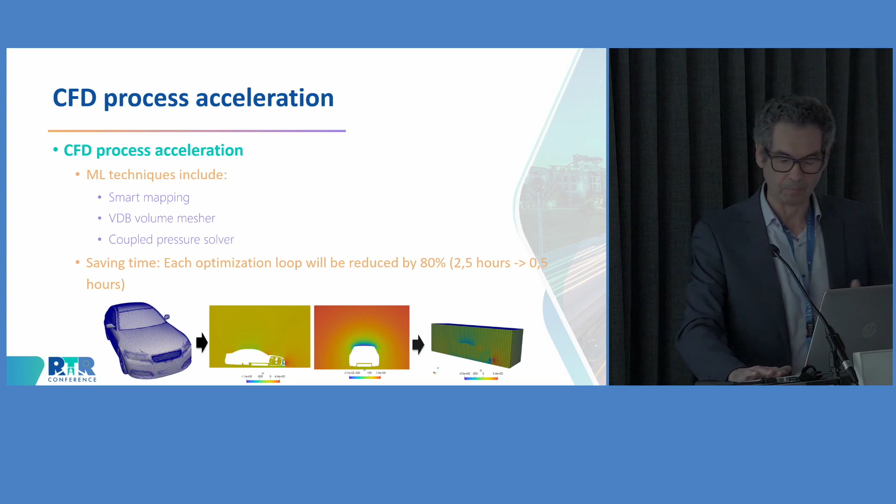In the end, we reduced the simulation time from 2.5 hours in this case to half an hour for the whole process, volume meshing, simulation, and extracting the results. So that's a second application of machine learning. Third application is still in the field of CFD.

What I was showing before, these 2.5 hours to 0.5 hours, is with a bit simplified approach that's called Reynolds-averaged Navier-Stokes CFD solution. Basically, in flow, the natural feature is really chaotic. You will have turbulence that's really hard to model. Indeed, it's impossible. So a typical technique is averaging these fluctuations, okay? And then the solver needs to make some assumptions, some simplifications to compute the whole system, assuming that in some zones there are these fluctuations, okay? That's where we introduce more error.

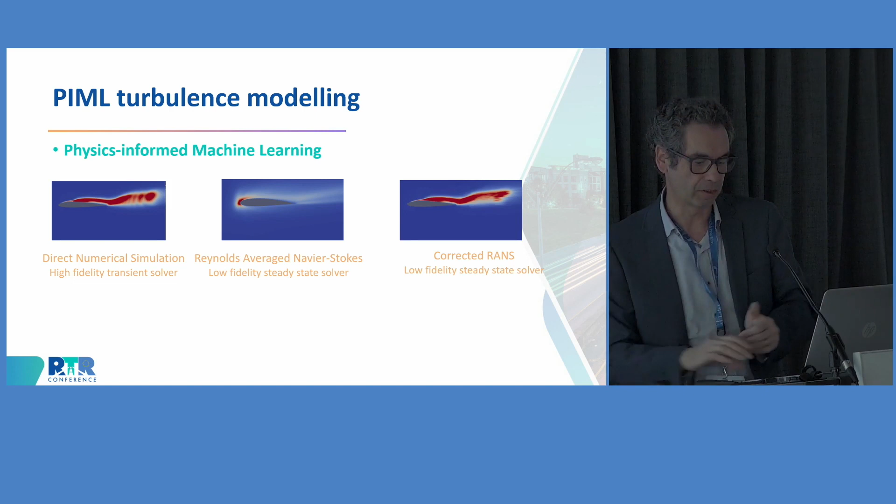So we have a different approach, what we call high fidelity simulations, where we simulate all the vortices and all the fluctuations and so on. And we had the idea that what we were missing in the simplified approach, basically the computation of what's called Reynolds stresses, depended on some variables in this high fidelity. So we tried to learn patterns out of this to be used in the end for improving the accuracy of these simplified CFD simulations. So that's the third application in CFD.

And finally, the second block, the application to crash, which is maybe closer to the audience today. A lot of structural analysis people may be here. The challenge that we had, it's really a challenge. It's simulating a crash with a battery pack with all the battery cells and being able to predict short circuit in any cell inside the battery, okay? This was not possible back in 2018.

And why is it not possible? Because you can see here, these are all the layers that you will find in a single cell. Only one cell, and you can find thousands in a battery pack, could be, I don't know, 5 million, 8 million finite elements, okay? If we sum up everything, you need one century to simulate this, okay? So that was not feasible. And here is where the machine learning approach comes in. We used what are called reduced order models.

Basically, we tried different techniques, but in the end, the most successful one, which has been developed by ESI Group, is using what are called constitutive-less material cards. Basically, it's using a material card that learns from, let's say, micro or meso models, okay? Our meso model is what we are showing. So we simulate one of these with many different load cases. With these results,

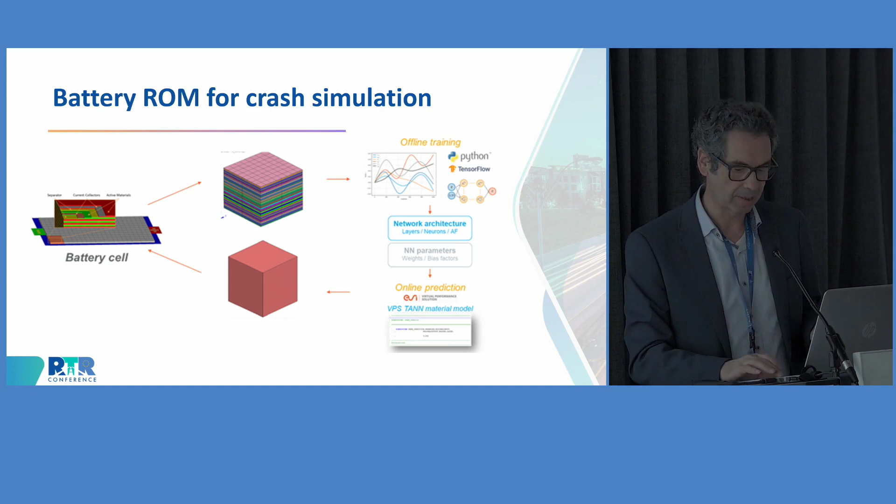this machine learning tool creates the material card for the cell, which is an anisotropic material card that can learn from all this. Okay, and then you can introduce this in the overall crash simulation, not only being able to simulate the deformations, but also looking at another variable, the risk of short circuit. This was introduced, tested and finally used by 2 OEMs in the project, in this case Volkswagen and Fiat.

And here, well, a couple of slides about the summary. Yeah, 2 slides, thank you.

Well, the first conclusion is that we have been successful in this. This is implemented with different levels of TRL. I can explain a bit why, for each of the topics.

Basically, in the case of crash, this can be used already by companies, but needs kind of customization, special support from the software vendor. So it's not available when you buy the software already - it's kind of a beta version, and can be done.

Same for the CFD accelerated process. In this case, there is a software vendor here called Engys. If you use their software, most of this accelerated CFD process is included.

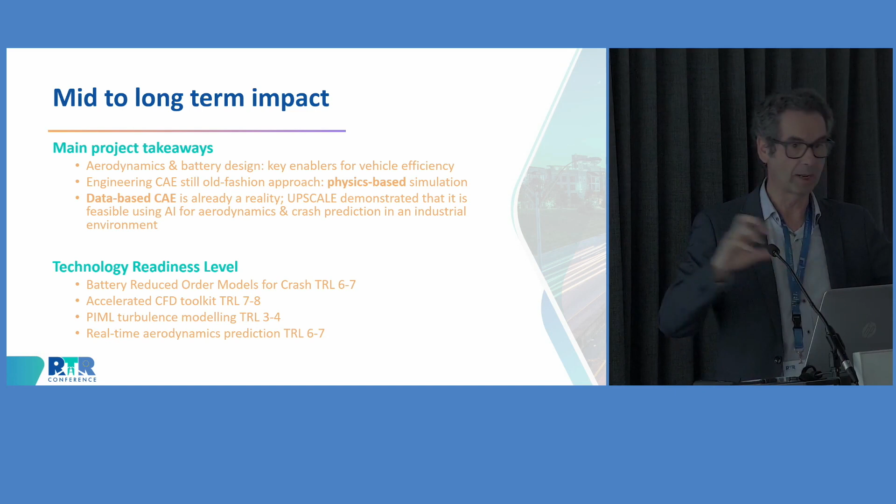When we started, this was completely new. We know that there are several companies already doing this. The problem is linking this with the design process - linking what we have been doing so far with the design tool, so that you can read directly from the design tool and then get the aerodynamic forces.

And I wanted just to finish by commenting a bit on what are the limitations of what we have seen so far. There are also some drawbacks or limitations to introducing this in the future for the community. Data generation can be extremely costly, and this can be very limiting.

For instance, for aerodynamics, we need to generate 1,000 CFD simulations for afterwards computing very quickly - maybe it's not worth it. It's better to use a standard, because otherwise you've devoted, I don't know, 2 months to generating cases and cases and cases. So that's what we don't like, okay?

And the second point is because of this - the solution is restricted to what we have. So in the end, this is kind of knowledge management, but it's not about guessing outside of this design space. That's one of the problems, and one of the areas of research for the future.

So in the end, these are the limitations, and we've figured out some key areas where we can work to progress with this. Hybrid technology - I forgot to comment on a very important point. We are losing the link with reality here, with the physics, and this could be something that people don't like. So we always need to correlate, validate, and so on.